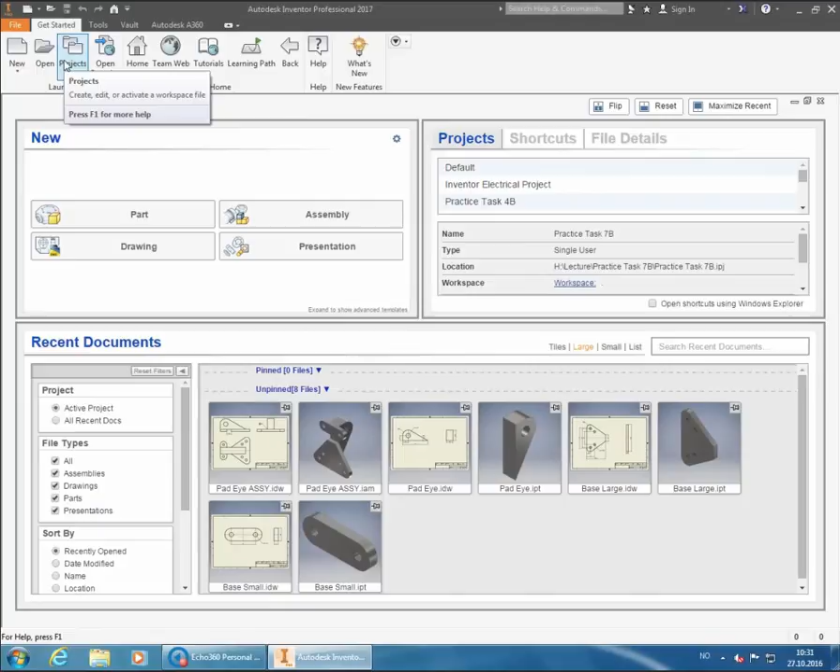First off, I'm going to start up a new project. Go up to the projects folder and start a new one - a new single user project. Find the correct folder on the H server and create a new folder there: Practice task 8B. No, 8A, it was supposed to be, so I'll change the name to 8A, and also give the project name as practice task 8A.

Just like last time, we're going to create all of these parts in the same project, so this is the only project we're creating with regard to this practice task.

So then we'll start off with the first part. Preferably we'll have everyone with us on this, but if you feel confident in not following the lecture and doing other assignments, that's completely fine. That's up to you guys on what you want to do.

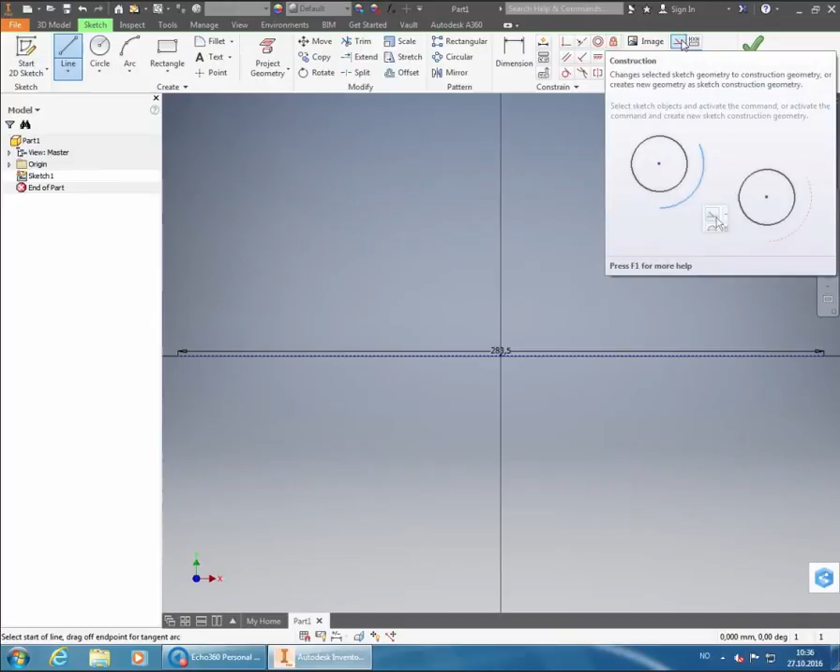What I'm going to do now is create half of the outline of this shaft - the top part of it - which means I'm going to choose the line function again. But now I have to remember to remove the construction line, because now I want a continuous line instead. So I need to go to the construction line option and click on that so it's not blue anymore.

I'll start off in one of the ends of my axis line. Right now I'm not going to set any of the diameters right away, just create the line up here. I'm going to set lengths as I go along, but not the diameters - I'll put those in with the dimension tool afterwards, just to show you a neat trick. I'm putting this line straight upwards for a bit, then creating a line parallel to the axis that's supposed to be 35 millimeters long, starting in the thin end of the shaft. So 35 millimeters - click tab to lock that into place, then enter.

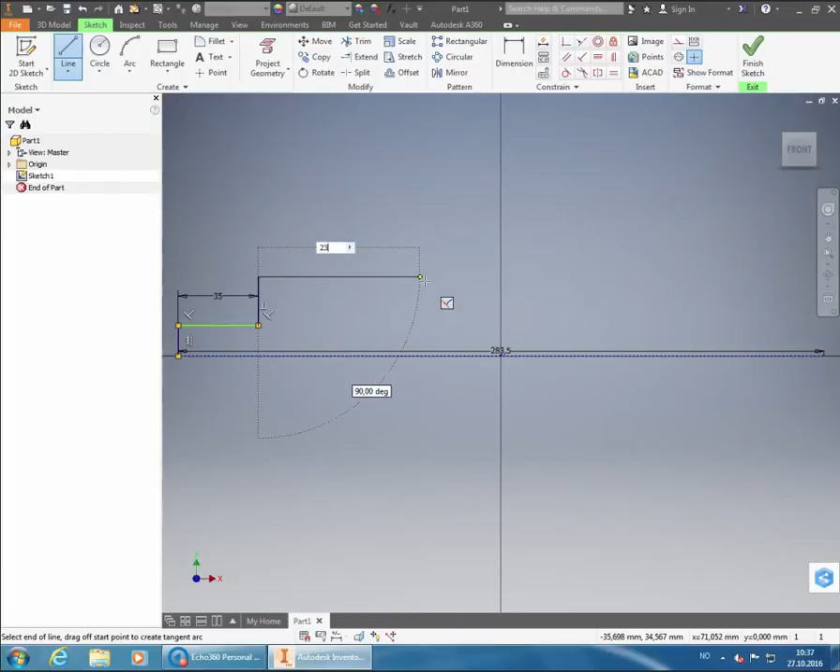Then I'm going to have an even thicker part of the shaft. So I need to go straight up here for a little while. And then I'm going to set another length. And this length is going to be the total length. Let's see, 283.5.

And of course, minus the 35 we just put into place. And then minus the other lengths that we have, so minus 36 and 34. And it's going to give me a total length of 178.5 millimeters on this one.

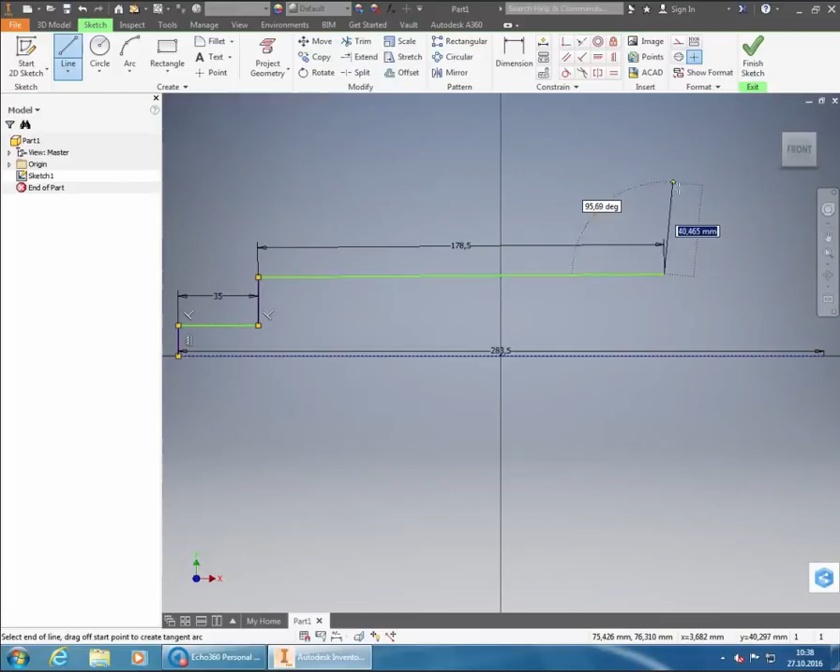Hit the enter button there. Now it's supposed to be a little bit wider again. And I can see I didn't get that one to be directly as it should. To fix that one.

I had to fix my line a little bit because it hasn't been placed in a horizontal position compared to my axis. It was slightly crooked, so I just needed to make it parallel.

Then I'll continue from the end there. I'm going to make it a little bit thicker again. And then I'm going to have a length of 34. So I've locked it into place with a length of 34, and I press enter.

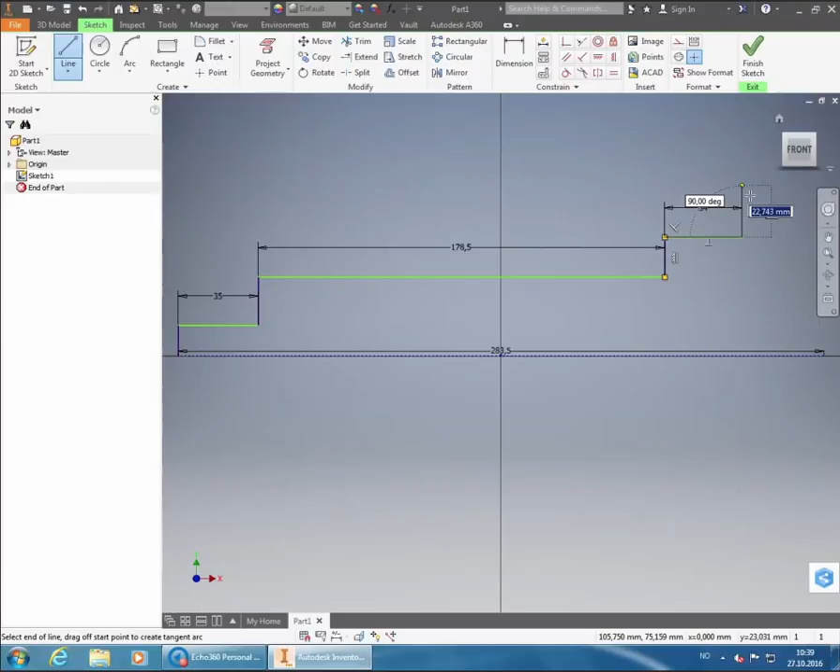And again, it's going to be a little bit wider, so a little more up there. We're going to zoom in a little bit here, because now I'm going to try to attach it to the end here. And now we've got 36 millimeters, and that's the last section that we have on this shaft. So I'm going to put it in there, and then I'm going to connect it to the axis line down here.

So I'm just going to zoom out so everyone can see a little bit here. So we have the first part was 35 millimeters. The second part was 178.5. The third part was 34 millimeters. And the last part is 36, once you attach it directly to the end of the axis.

We haven't set the height yet, so we're just putting in random heights right now, because I'm going to show a pretty nice trick of setting diameters here instead of heights.

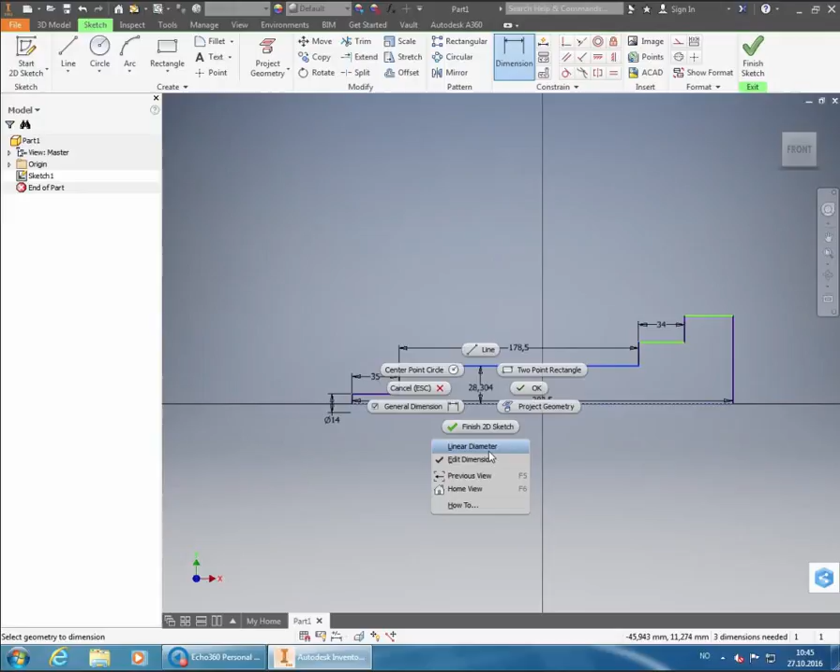And this one is supposed to be also threaded at the end, so it's going to be M20. That means it has a 20 millimeter diameter. So we put in 20 there. And this one also goes to the imaginary point on the other side of my axis.

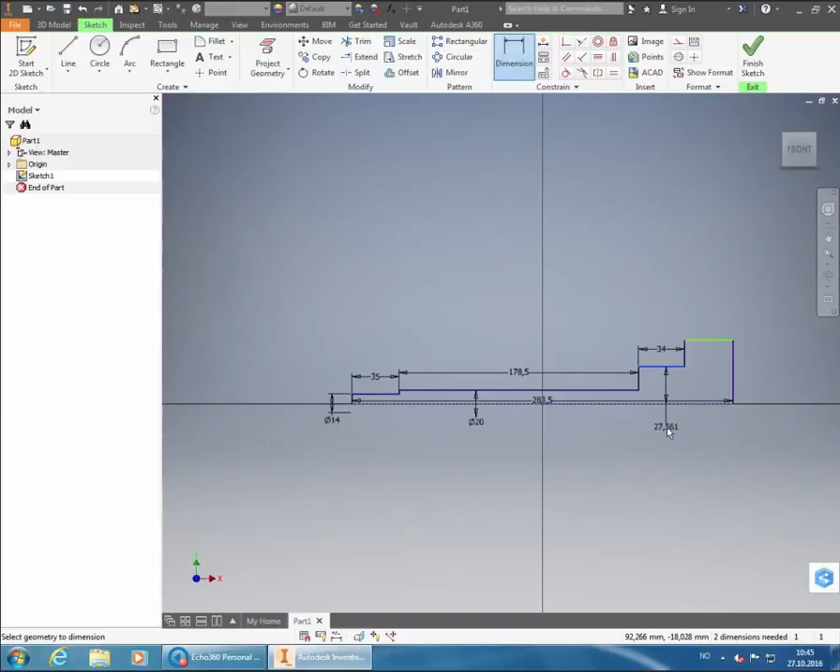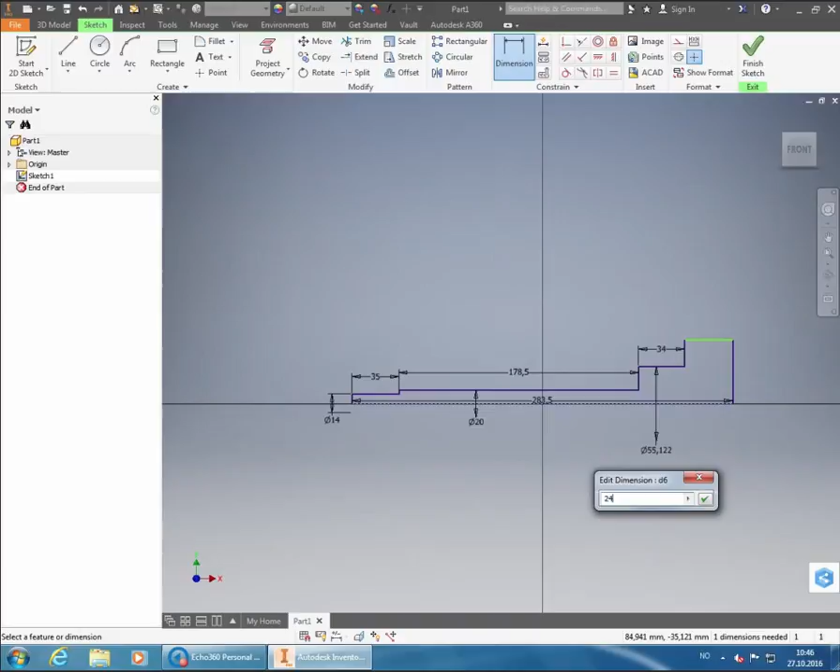So I do the same for the last two parts here. Right click and choose linear diameter, place it. And this one is going to be 2 millimeters thicker on each side, so it's going to be 20 millimeters plus 2 plus 2, so it's going to be 24 millimeters in diameter. That's because we're going to put a chamfer, 2 millimeter chamfer on the edge there once we've finished revolving this one.

Then we'll do the last diameter here. I'll zoom a little bit in here. I click on the axis, on the horizontal line, right click, linear diameter, then I place it, and this one is supposed to be 42 millimeters in diameter. So I'll zoom out a bit so that we can see everything.

Doing these dimensions in diameters isn't really necessary. You could have put in the diameter and divide by 2, just giving the length from the axis. Wouldn't have been a problem at all. But it makes it a bit easier to visualize from your sketch how this is going to look.

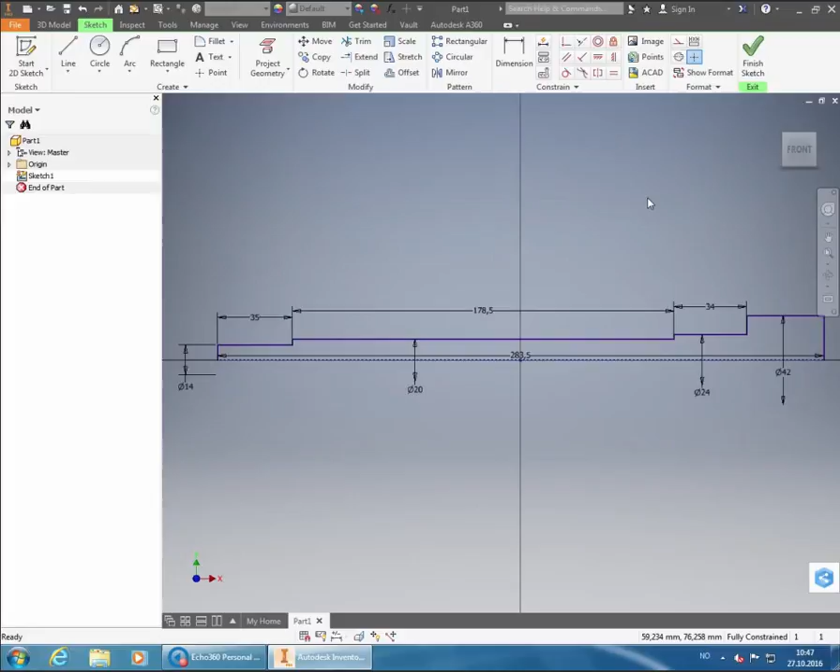It also makes it quite a lot easier if a colleague of yours later on comes in here and does some changes to this 3D model. Then they will very easily see what is what in the sketch of the 3D model, so that they can easily change stuff.

Now we're going to click Finish Sketch. We can see that we have everything fully constrained down in the corner here. So I click Finish Sketch there. I'm going to zoom out a bit so that we can see everything here.

Now we're going to use the revolve function, which we haven't used before, at least I can't remember. The revolve one is beside extrude, and it basically does the same thing as extrude, but extrude takes the outline from the sketch and pulls it in one direction, while revolve instead rotates it around an axis, so it basically looks similar to turning a workpiece in a lathe, so it's more similar to how it's going to be machined if you're doing the revolve here.

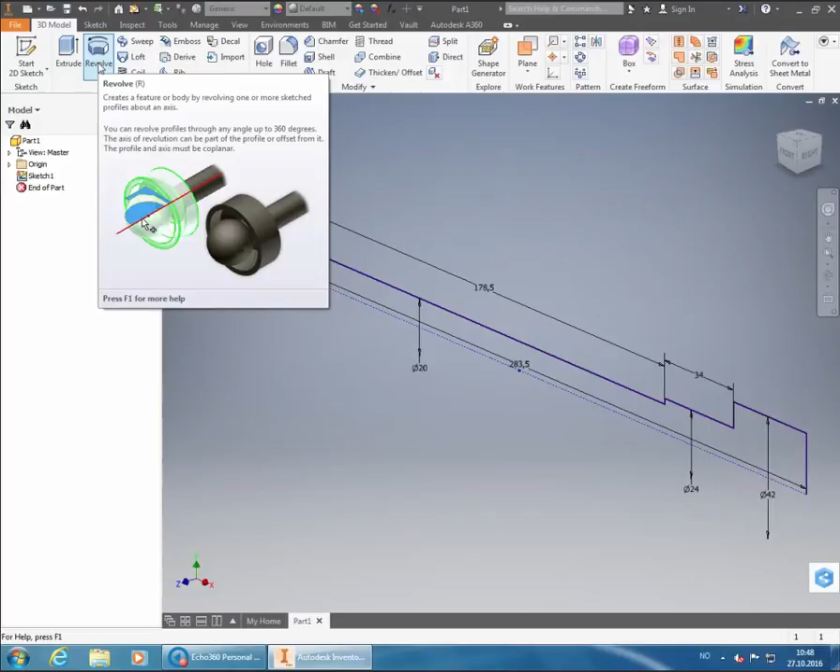So we click on revolve. I'm going to drop down the menu in the window there, just to show it a little bit better. First off, we need to choose a profile, and the profile has been chosen. Looks like it. And then we need to choose our axis, which is the construction line from our sketch.

Now we can see a preview of how it's going to look once it's been revolved around that axis. You also have the possibility, if you want, to not have it revolved a full circle. That's up in Extents there. It is possible to set a specific angle. For example, if I put a 90-degree angle here, it's only going to revolve it 90 degrees, not the rest.

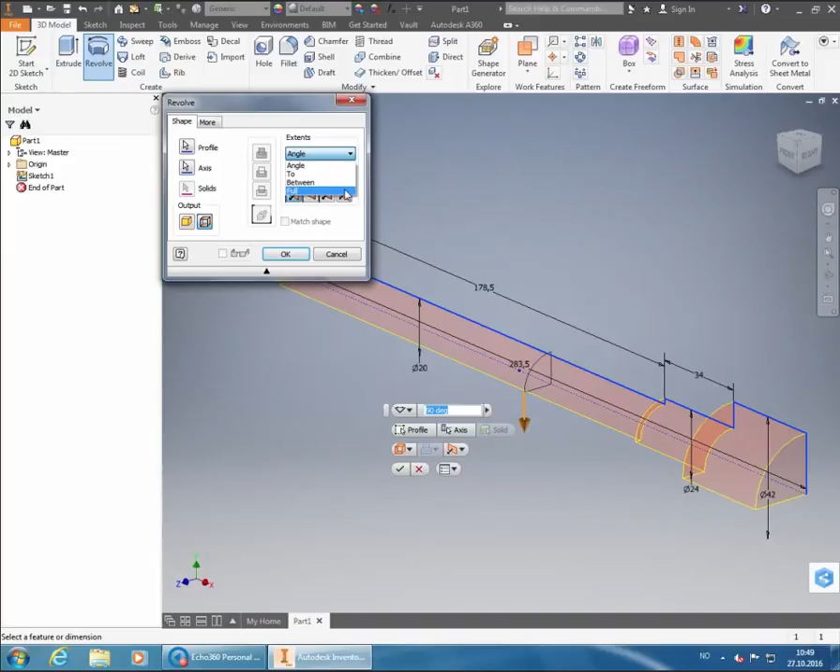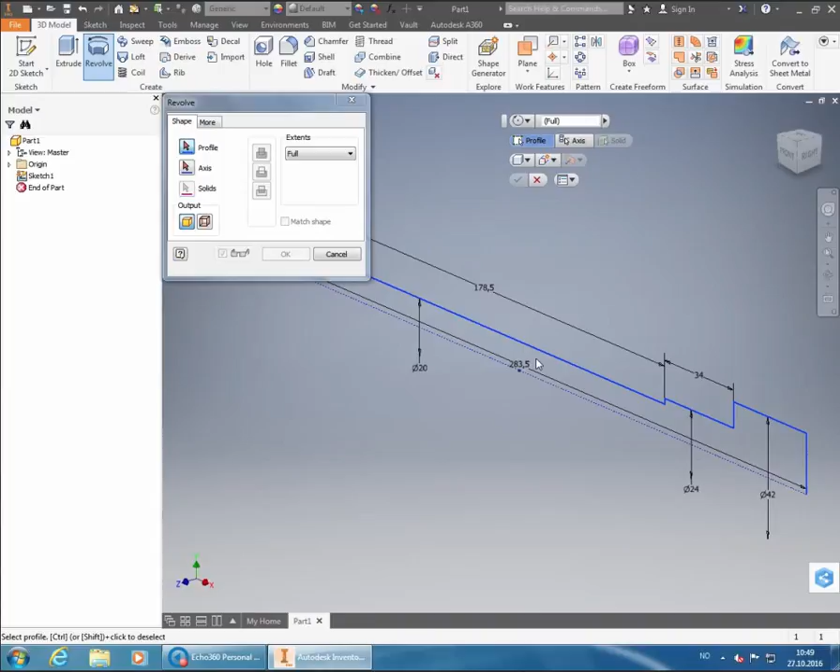But of course, we want this to be an actual shaft, so we're going to have a full revolution, 360 degrees, in order to get everything in here. Then we click OK. And I did something wrong there. Let's see. Yes, I hit the wrong one here. Let's see. I didn't want to do that.

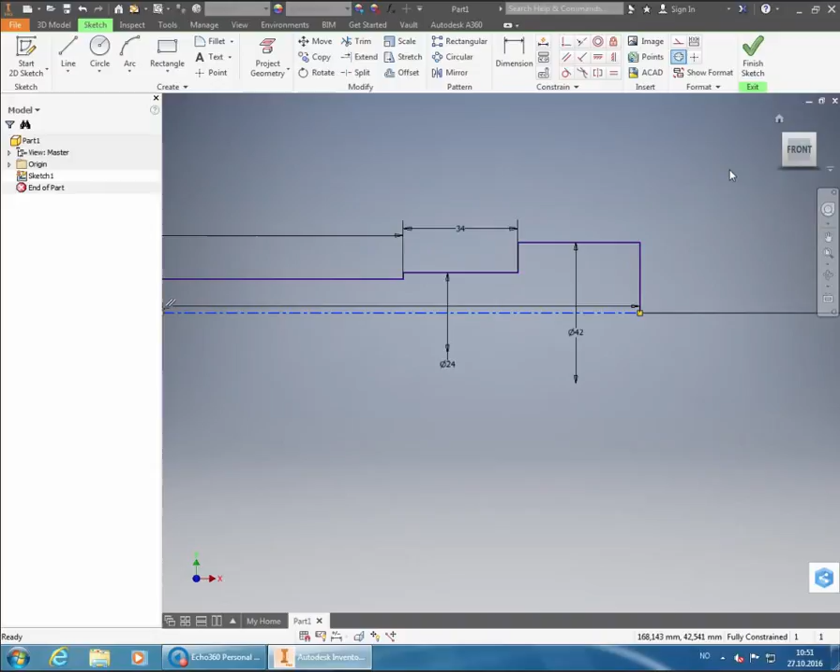So once that has been changed into a center line instead of a construction line, the revolve is going to function properly. It even chooses everything for you directly.

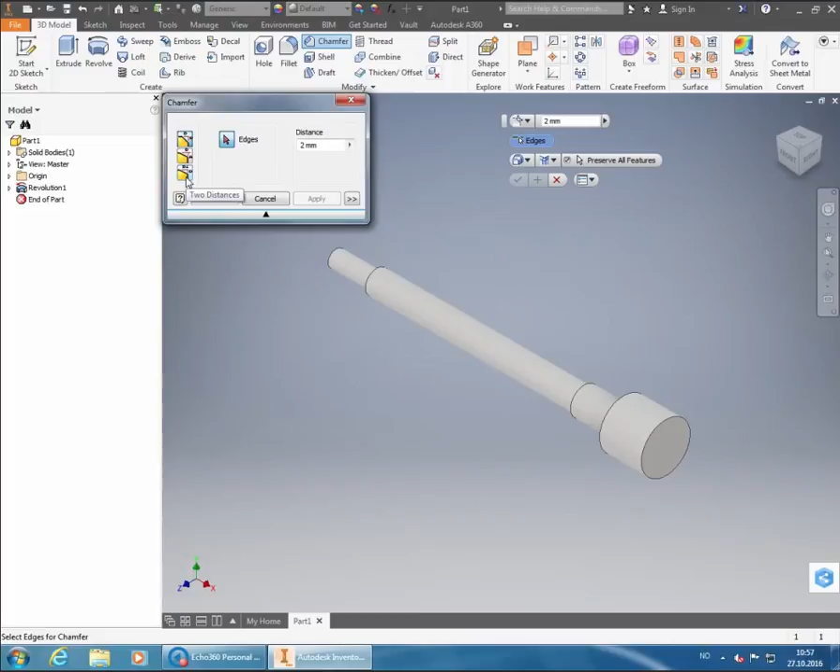On the edge here, we're supposed to have a certain diameter and a certain length in. So we can't use the regular one with 45 degrees that we usually use. We have to use another one, the third option here, which is 2 distances.

Then I'm going to click on the edge here, and zoom in a bit so that we can see the arrows. Now we can see the orange arrow is pointing towards the center here, so that's going to be the diameter measurement that we need to set. If I switch to the other measurement, it also switches which arrow is orange, as you can see.

So for the first one here, that's going to give us the diameter we need, and the diameter is supposed to be 35.5. So I'm going to put in 35.5 — whoops, need to remove the millimeters.

But as you can see, this doesn't work. I'm getting an error message here. 35.5, that's way too much, because that's of course the entire diameter that we're supposed to have, and we're talking about a radius here. So I divide it by 2. But that's not quite correct either.

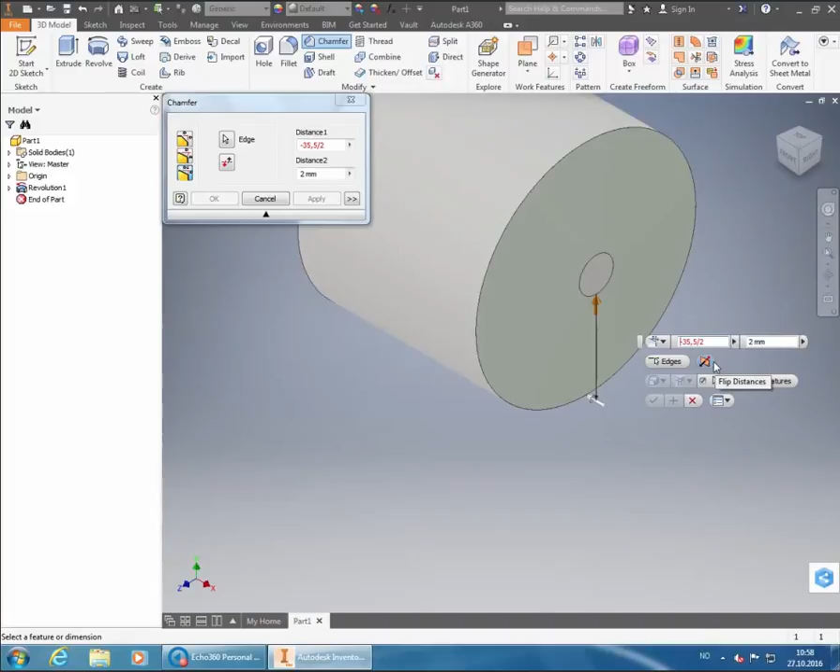So we need to go for this being subtracted from the total diameter of this one. So we need to have a minus in front there. Do you remember what the total diameter was? It was 42 millimeters. So we do 42 minus 35.5. But now we need to put those two in a parenthesis so that we get both of them divided by 2.

So this is going to give us the difference from the outside and into where we are supposed to be. So we have given 2 diameters, that's why we need to divide by 2 in order to get the radius instead of diameter. And we've done the external diameter minus the internal diameter, so we get a difference between those 2.

Then we can move over to the other one, which is going to give us the length along the axis that it's supposed to go, and this one is supposed to be 10 millimeters. So now we can see that it doesn't look at all like the regular 45 degree chamfers that we usually put in, but this is because it's supposed to fit inside something and have a complete seal against it.

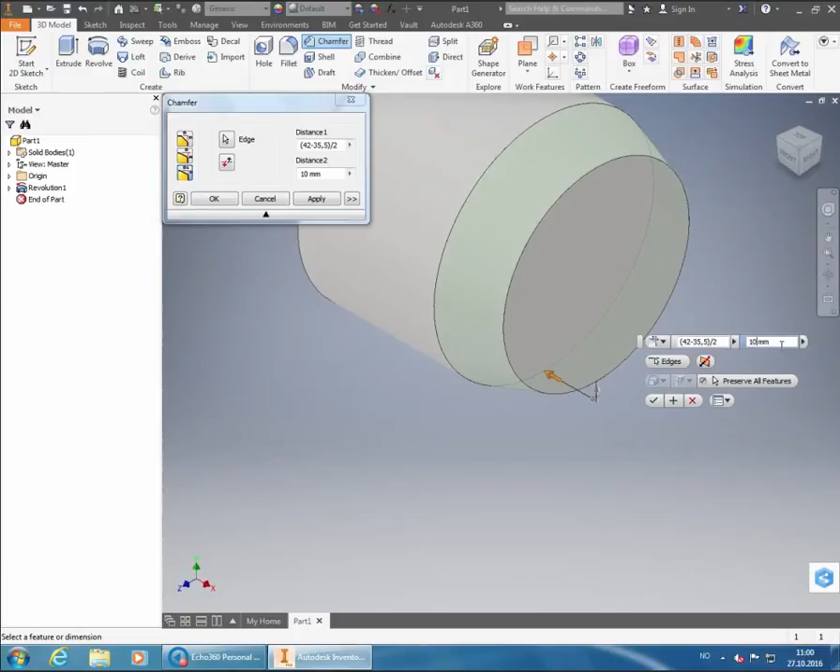So now we can place this one. Click OK. So that one is in place.

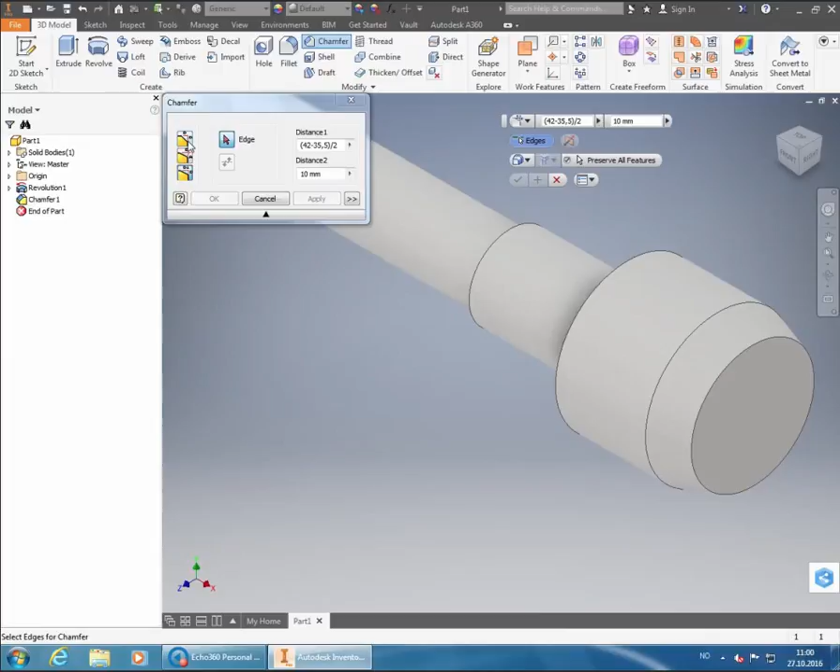The next chamfer that we're going to place is along this edge, and that one is a regular 45 degree chamfer of 2 millimeters. So we go in for our chamfer, we switch back to the top option there, which is the 45 degrees, and we switch the distance to be 2 millimeters. Then we select the edge there.

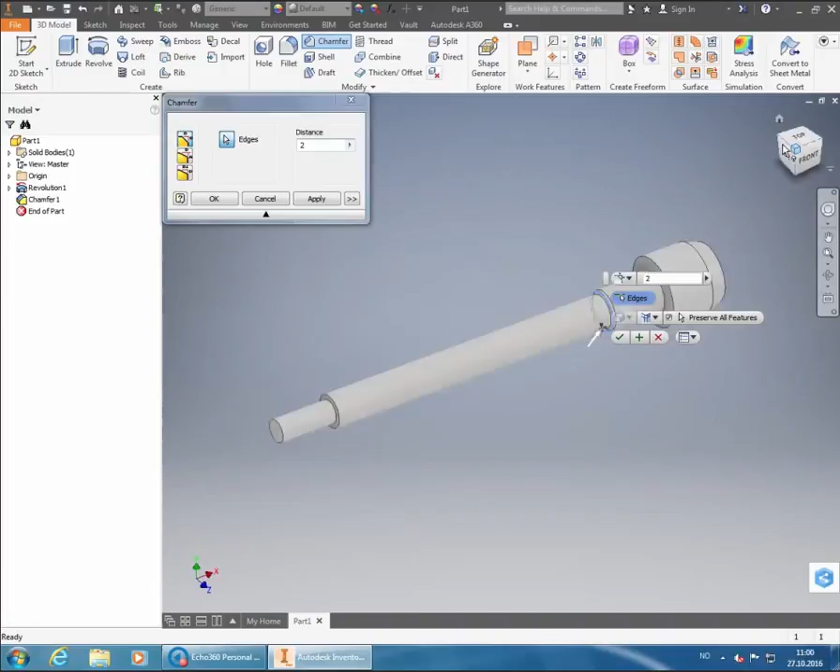I'm going to switch my model around so that we can see it properly. So there we have a 45 degree chamfer on that one.

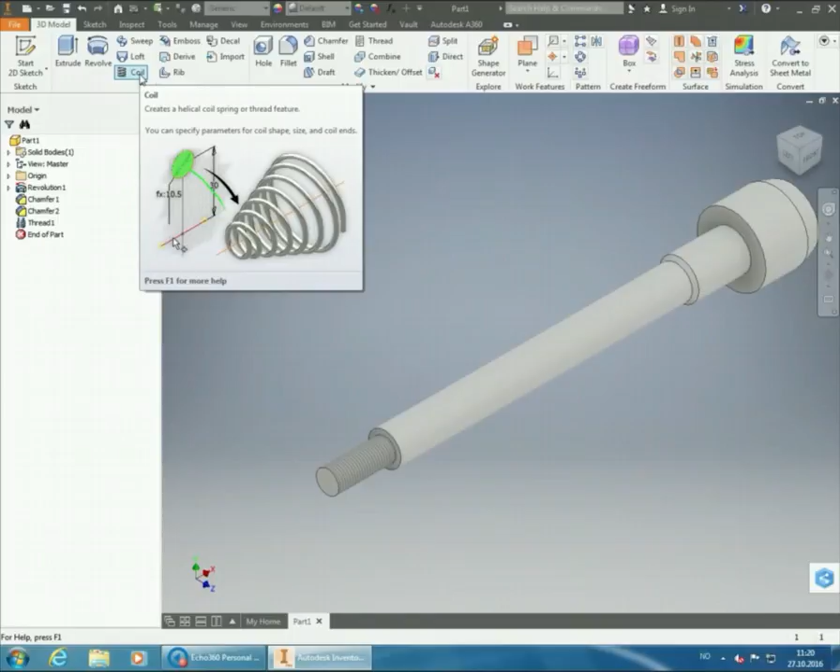So you would have to use the coil function, and it starts getting really complicated when you do that, which is why using the thread function is so much easier. Because when you're creating stuff like this, you're most likely not going to 3D print it - maybe a prototype, but most likely you're going to have someone machine it, and they only need this image information placed on top.

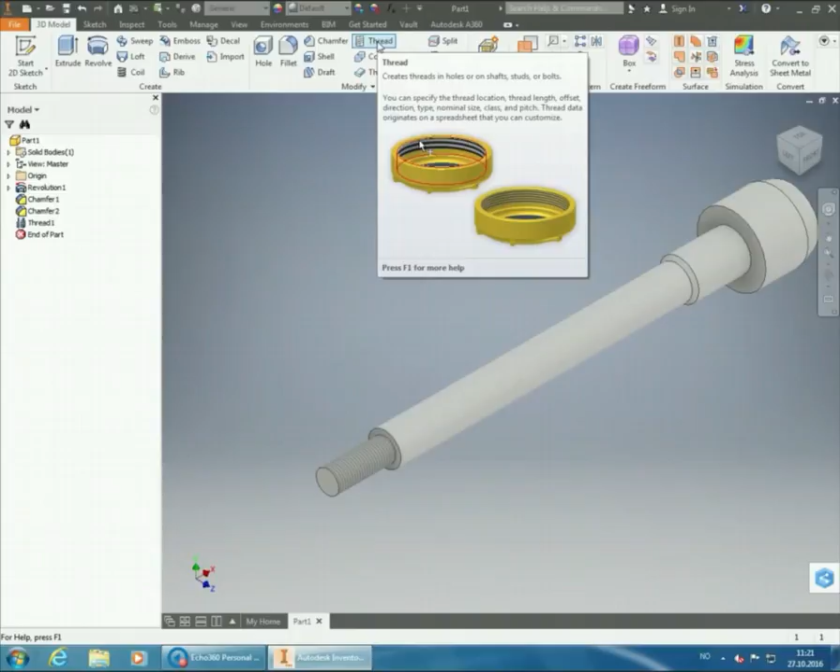So then we're supposed to have some threads going up here also, but on this part of the shaft we're only going to have the threads going 95 millimeters up, not all the way to the end. So we have to use the thread function again. We'll select this larger diameter, and you can see full length is chosen now, so it's trying to put threads all the way up. I'm going to select it first, then remove the check mark on full length.

Here we can see it's putting it over on this end - I don't want that, so I need to reset the threads. Now we can see it's putting it on this end. My problem with the first one was that my mouse pointer was too close to this end, so it shows that as my starting point. If I move my mouse pointer over here now, it also moves the threads over here.

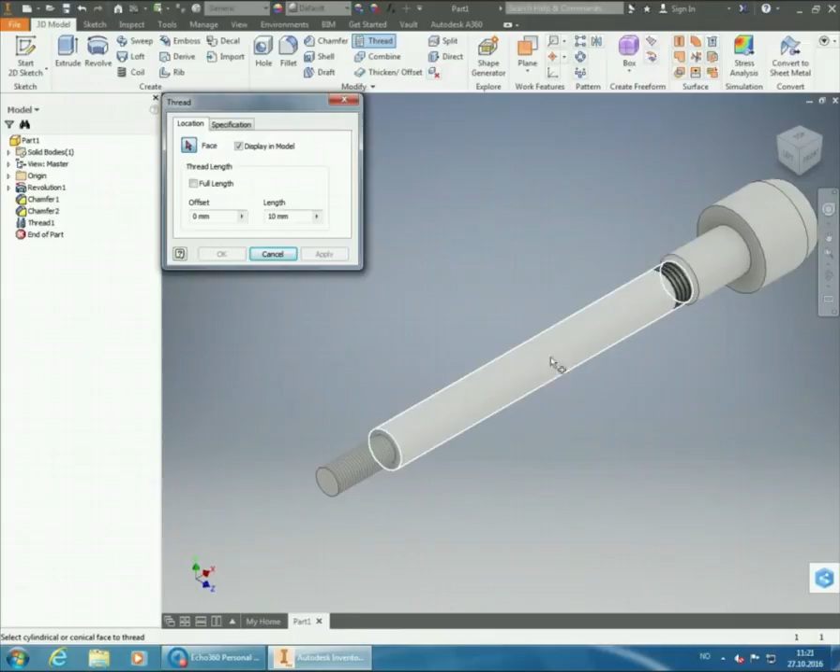So I'll move it back here, select it again, and it says 10 millimeters now, but it's supposed to be 95, so we need to change it to 95 millimeters. There is also a possibility of using an offset.

So if you want threads, but for some reason you want them in the middle of the shaft, you can use the offset, for example 50 there. Then I've moved the threads into the middle of the shaft. This might be necessary if you're going to have some cog wheels or something rotating here and then pushing the rod along.

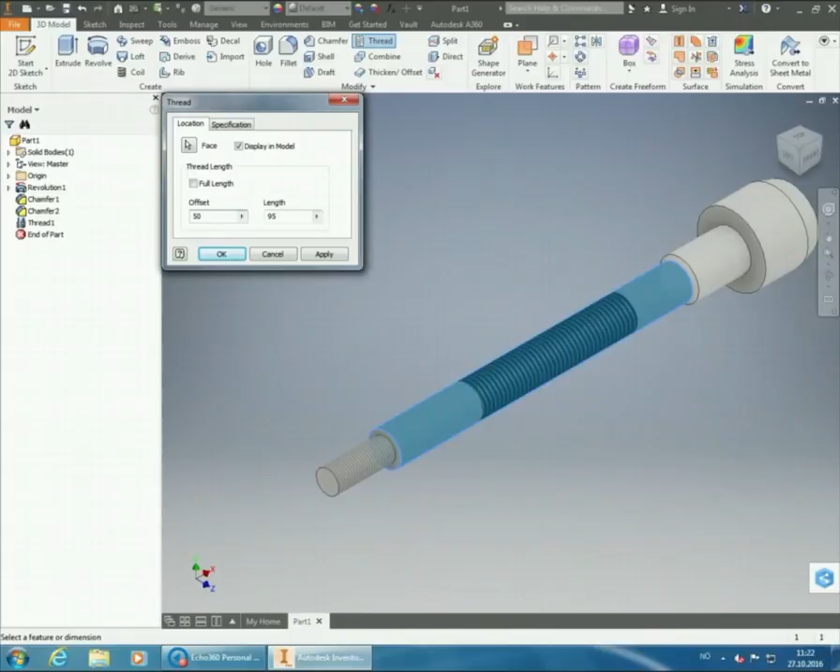But usually when you're using threads, it's in order to screw a nut onto them, so then you want them all the way to the end, or else you're not going to reach the threads with them. So we want 0 there.

Again, we'll go over to the specification. We can see that Inventor wants us to use ANSI, which is an American standard. But we want the ISO one, which is the European one, with the metric profile. And on this one, we're also supposed to have a pitch of 1.5.

So we change the designation, and we go down to 1.5. And you can also see it says right hand and left hand there.

Maybe you can remember, I talked a little bit about it in subsea technology, with regards to which way you are tightening and loosening your nut. Right hand is the usual one. When you are rotating it clockwise, it's going to be tightened, and rotating it anti-clockwise, it's going to be loosened. But if for some reason, if this is a rotating shaft and you need your threads to go the other way around so that it won't loosen itself while it's rotating, then you would choose left hand instead, because then you're telling it to go the other way. But so long as you don't have a particular reason for using the left hand, we always use right hand.

So we click OK there. So then our shaft is done.

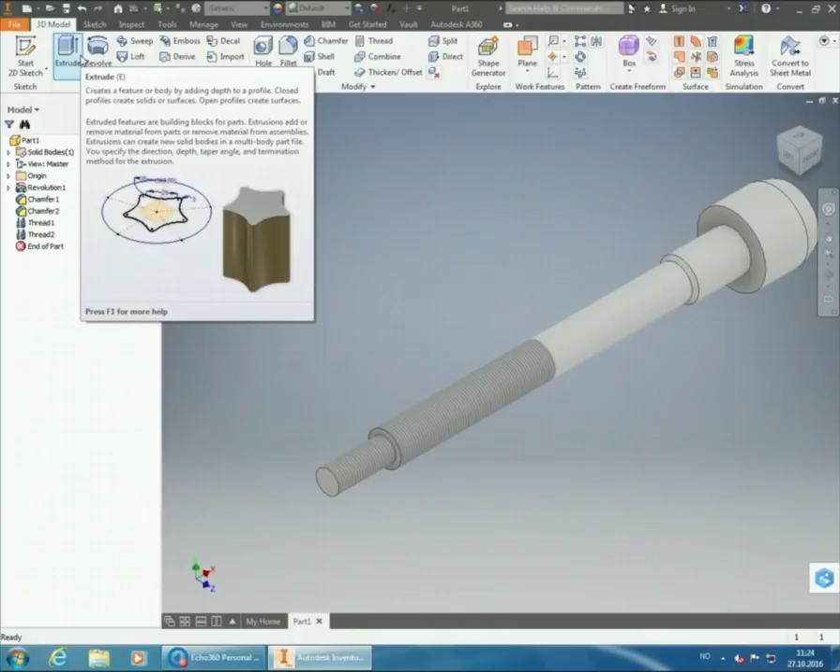We'll go into creating the drawing for this one, just very briefly, just so that I can show the dimensions for these two parts with threads. So I'll save this one, and this will be shaft. Save. Then I'm going to create a new drawing, ISO.idw as usual.

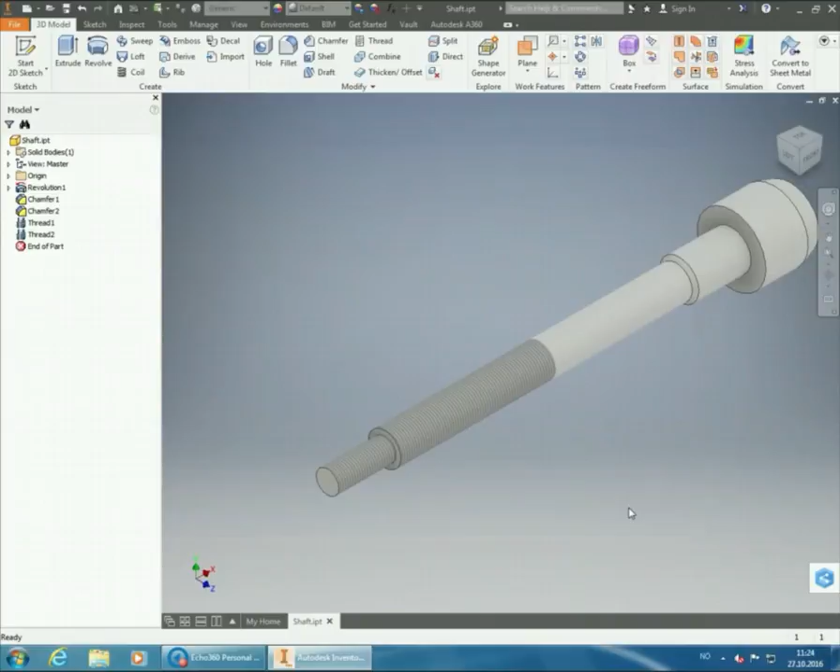Click create there. I'm just putting in my base view here. Have it on a scale of 1 to 1. Click OK.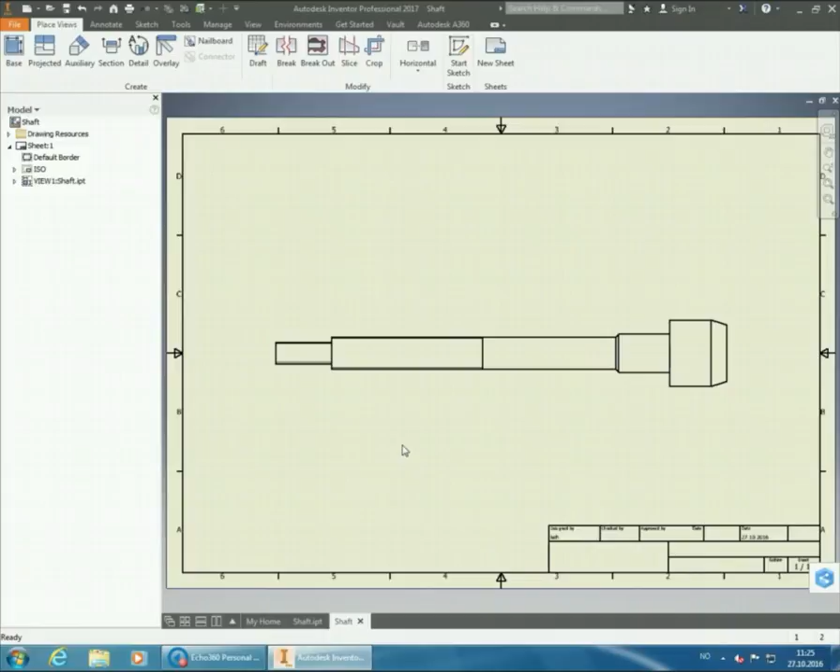So what we can see now, it looks a little bit different here, and that's because we have threads there. I'm just going to zoom in a little bit to show you better. Here we can actually see that the threads are being designated by a thinner line going on the inside there, and that's to show the smallest diameter in the thread cross section.

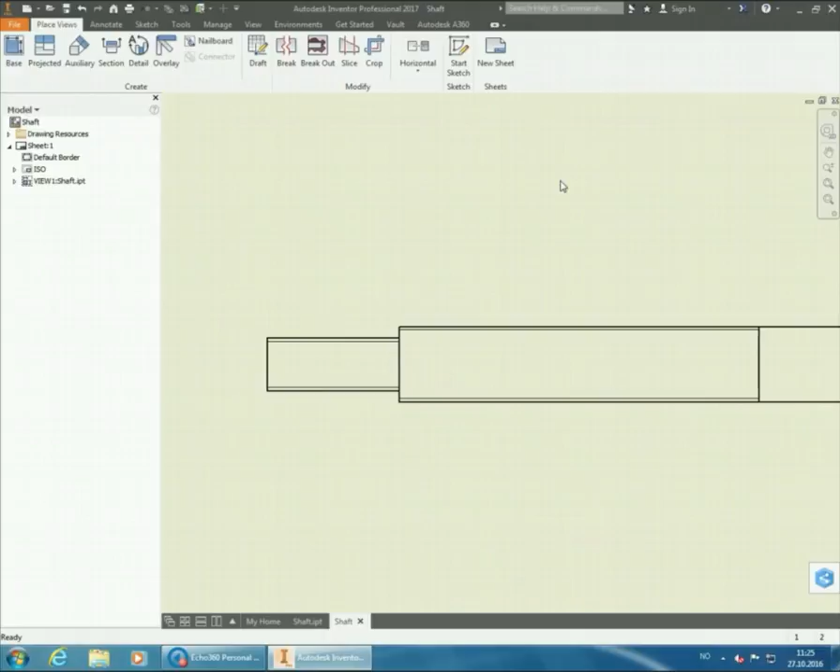So what we do when we need to show the dimension of threads is that we go over to the annotate part, and we use the hole and thread function. And instead of pointing it to a hole, as we've done earlier with the hole and thread function, we're going to click the edges of the threads here.

So putting dimensions on threads is fairly easy. We just use the hole and thread function instead of a regular dimension for setting a diameter, because then it's going to give us all the information we need with regards to these threads. I'll just save this one so I have it.

The next part in the compendium is a bolt, and if you follow what's being done in the compendium, it basically shows you how to do the coil function also to actually model the threads three-dimensionally.

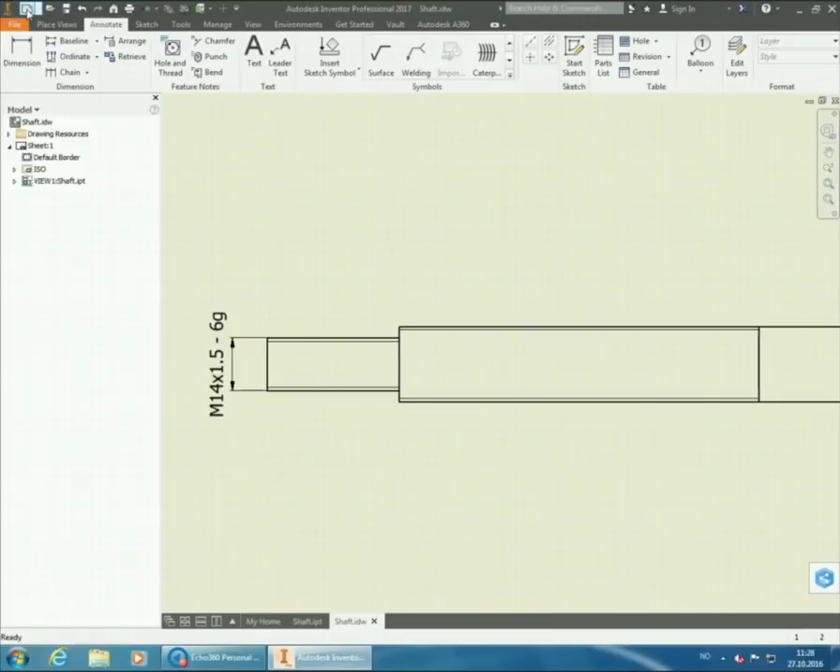Until we get to part 5 in this practice task, the valve flange. And now we're going to start on that one. So we're going to open a new part file, standard in millimeters.

So we'll start off by making the base of this valve flange, so the flange part itself. So we'll start a new sketch. And the base is circular, so we'll start off by creating a circle. We attach it to the center point in our coordinate system.

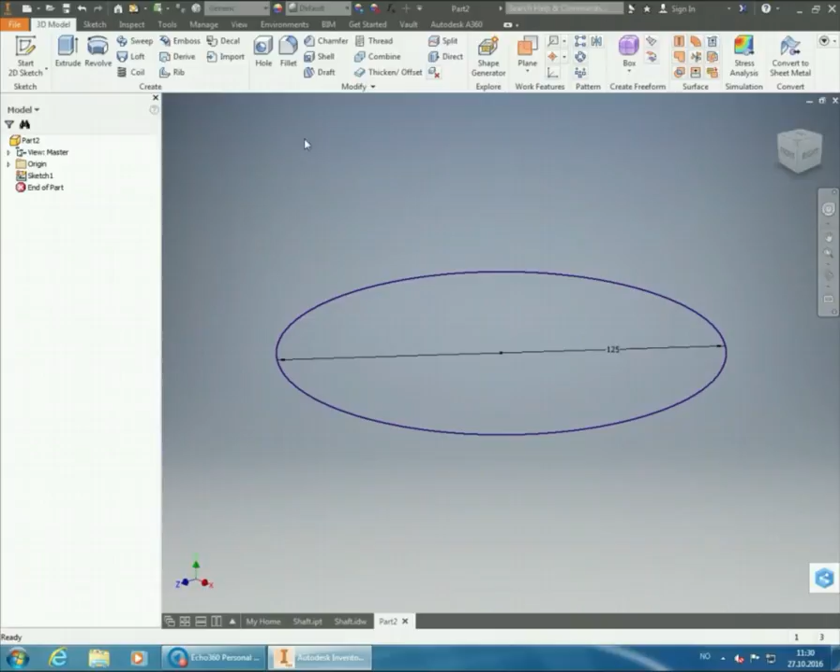And I'm going to extrude it. We're going to create a couple of holes in it later on, but for now we're just going to extrude it as a circular plate. The thickness is supposed to be 17 millimeters.

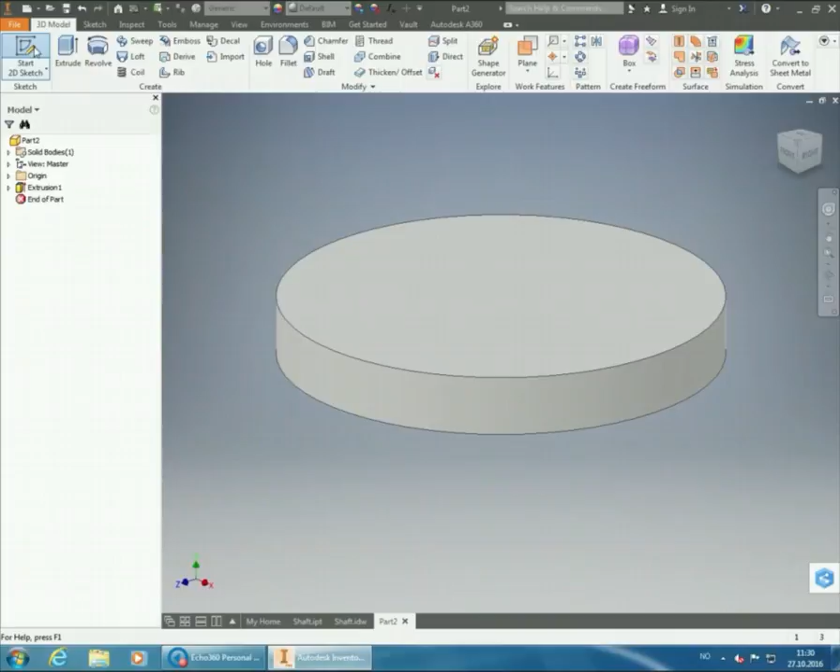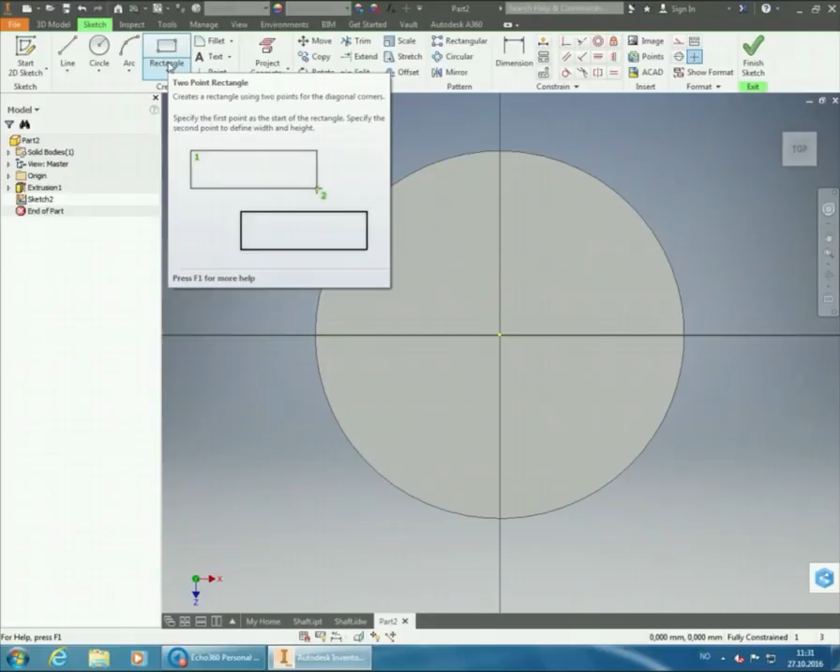Now we're going to create a sketch on top of this circular disc, creating the box that's going to protrude out of it. We need a rectangle centered in our coordinate system, so we'll use the drop-down menu and choose the rectangle option that lets us define the center point.

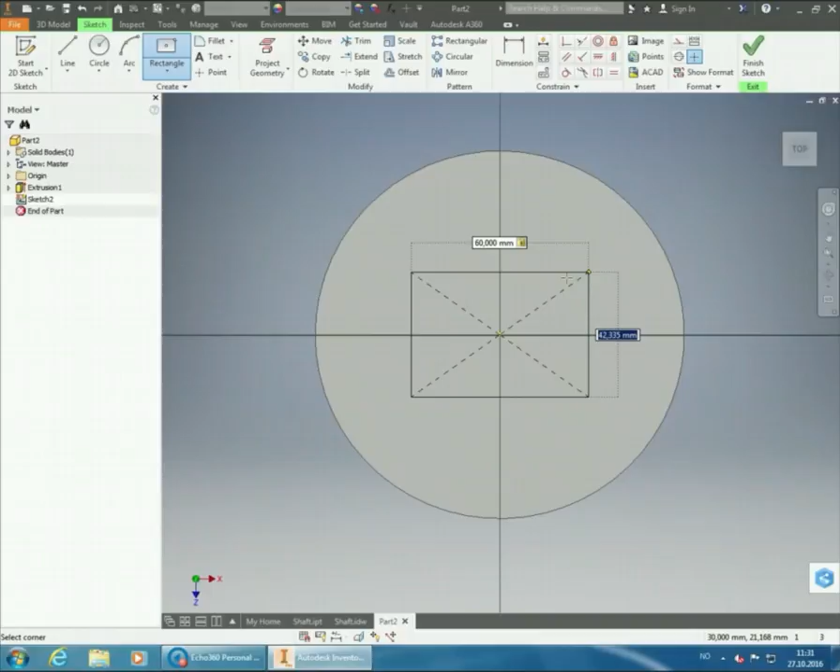It's going to be 60 millimeters wide. Use the tab button to go to the other dimension, and it's going to be 40 millimeters thick. Again use tab to lock the dimension into place, and then click enter.

Then I can finish the sketch and extrude this one, 80 millimeters tall. So now we have a circular disc with a rectangular box on top of it.

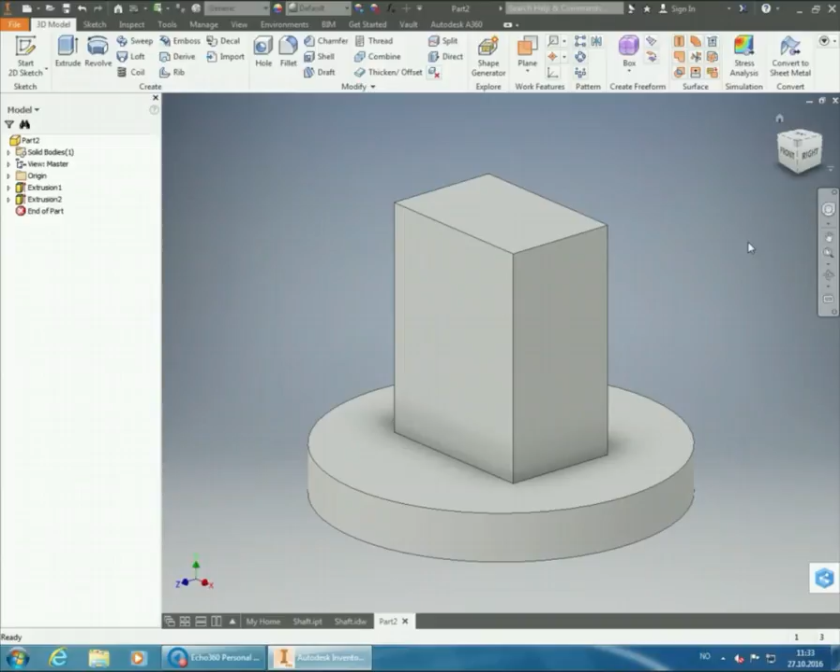The next step is to hollow out this box. We're going to create a sketch on the largest side of it, the one that's 60 wide. So we'll create another sketch here, just zooming in a bit.

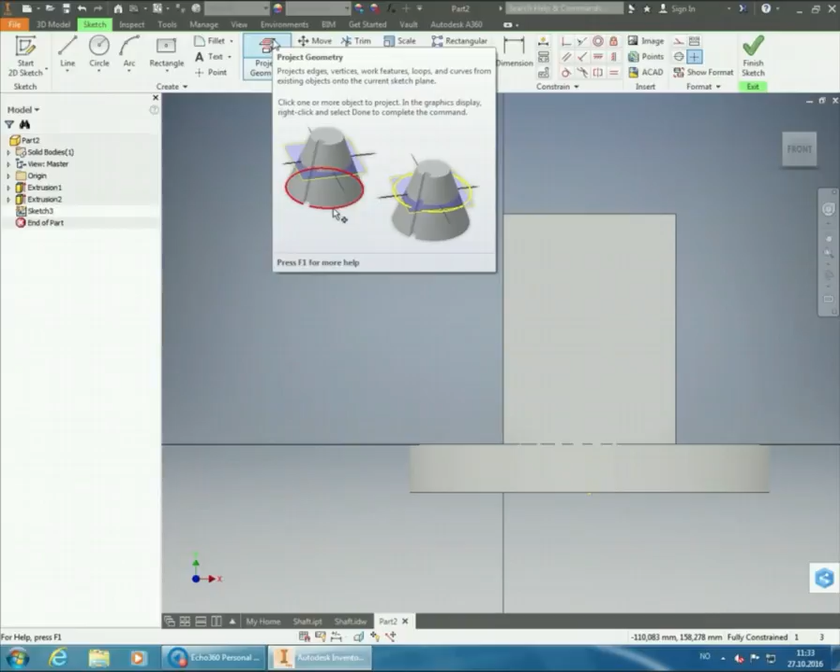To make life easier, we're going to project geometry so we can attach our sketch to the edges here, getting yellow lines showing everything. Since the plane of our sketch isn't the same as the edge of the circular disc, the disc is actually sticking out of our sketch right now. So we can press F7 on the keyboard.

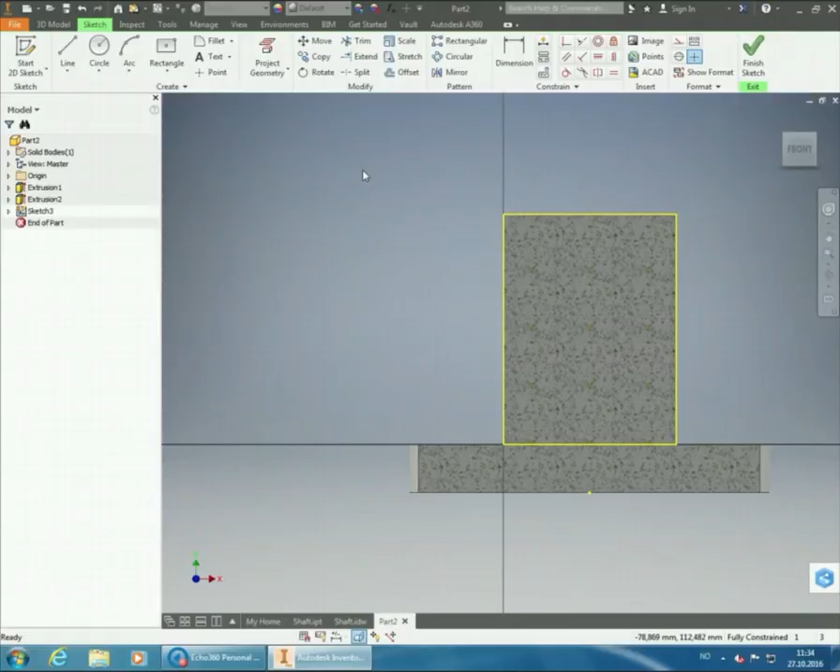Pressing F7 shows our 3D model as cut instead, which makes it easier to see exactly what we're doing if we're modeling into the disk. Pressing F7 again pops it back to normal. It's not a big problem here since we're only modeling on the flat surface, but once you're modeling something hidden by something else, it's nice to use F7 to see what you're doing in the sketch.

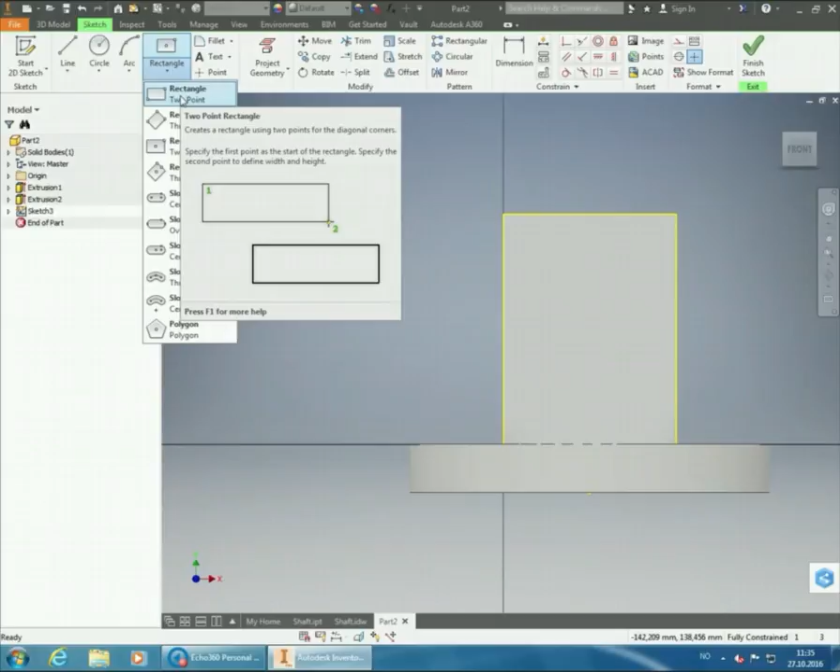So I'll leave it visible like this while we're doing it. This time we're going to create a new rectangle, just a regular one where I set 2 corners, since I'll set the dimensions afterwards. I'll just place it fairly randomly inside here.

Then we're going to set the distances to the edges. We go up to dimension constraints, and we're supposed to have 10 millimeters to the edge, so 10 millimeters up top there.

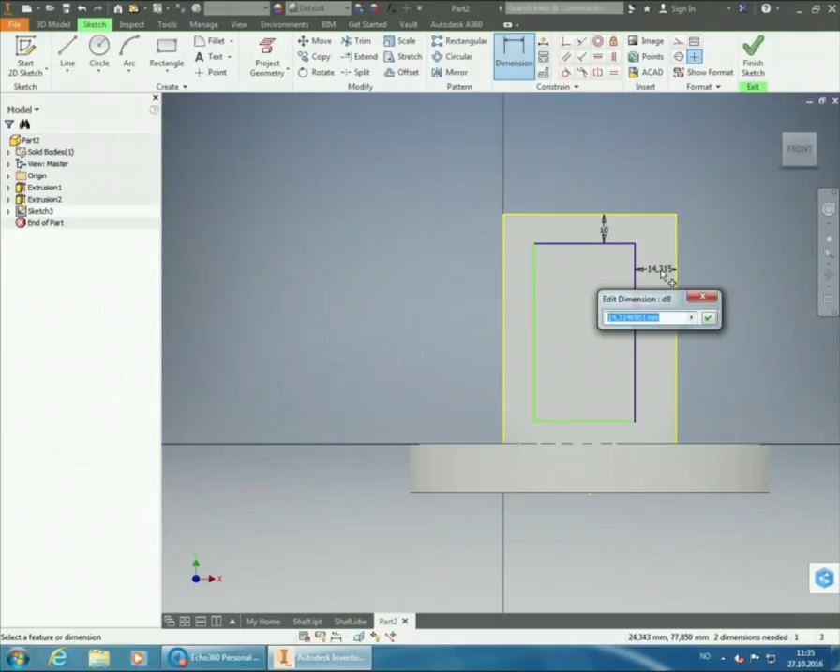Then I can do the same for the sides. In case I need to change this dimension later, I'll connect it to the top one so I only need to change one to change all. I'll click on the top one and place it, doing the same down here and over here. So if I change the top dimension now to 12 millimeters, all of them are going to change to 12 millimeters.

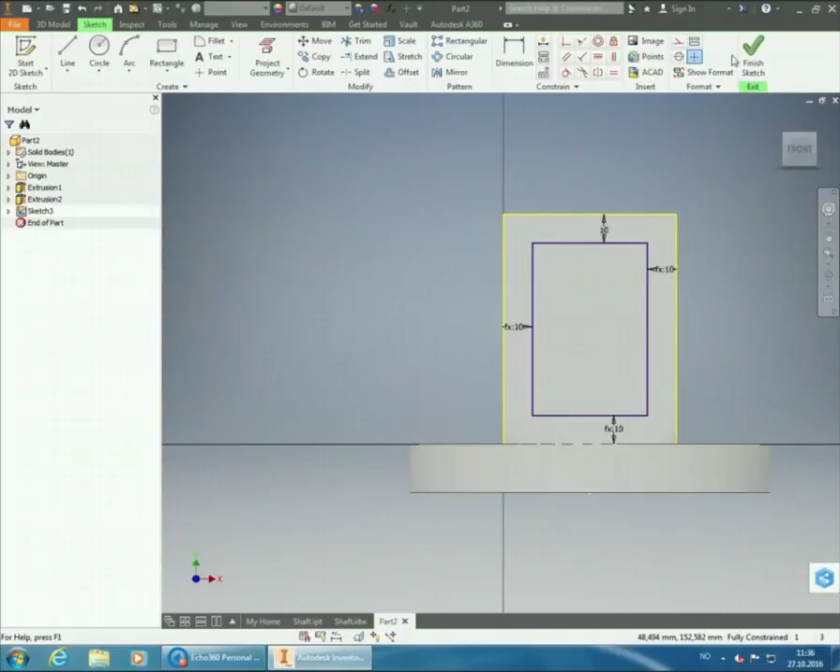Once that's done, we finish the sketch and use the extrude function to make a cut through the box here. Since we put in the yellow lines, Inventor doesn't quite know what outline it's supposed to use - is it the small rectangle or the large rectangle? So we have to tell Inventor that we want the center rectangle to be extruded.

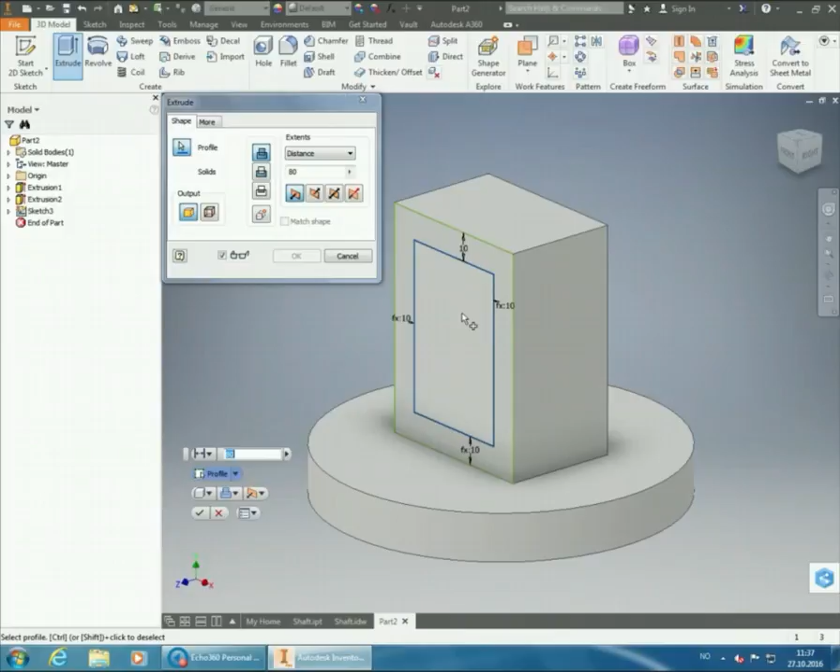The default in Inventor is to extrude and create more material, but we want it to be cut, so we'll go over to the cutting function. In this case, we could let it stay at 80 on distance, or we can choose all, since that will cut through all of the material no matter what.

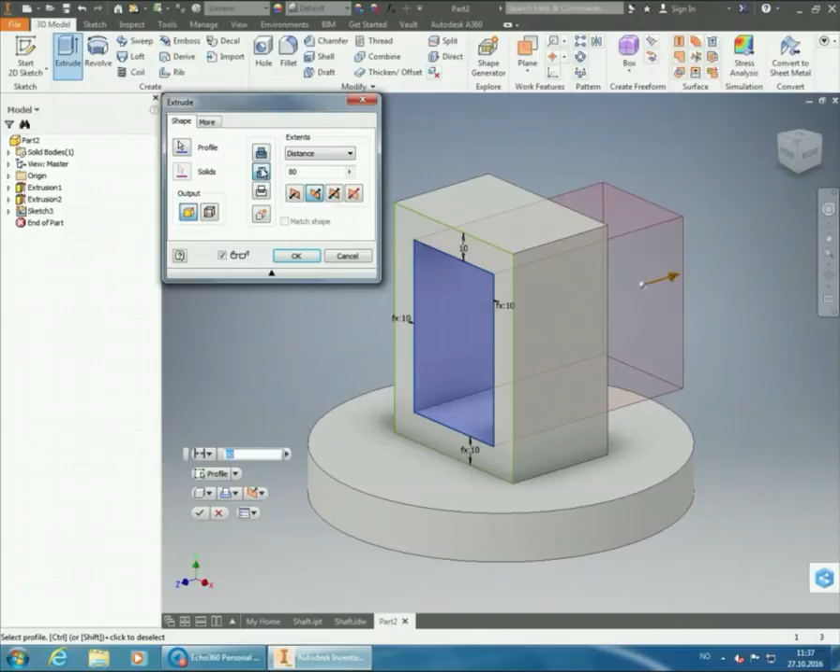So if I rotate my 3D model a little bit now, we can see that it's possible to see straight through it. So we've created a hole straight through it.

The next thing we'll do is create fillets for all of the edges of our square box. We're going to have 5 millimeter radius fillets on everything.

I'll just rotate it back here and go up to the fillet function. We want a 5 millimeter radius, and then we just need to start clicking on all of the edges here on the box. I'll start up top.

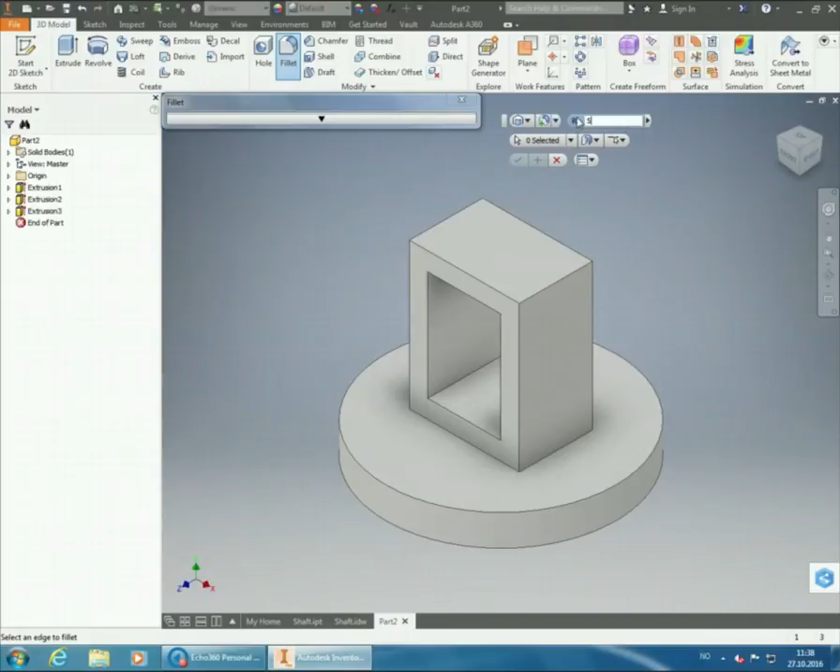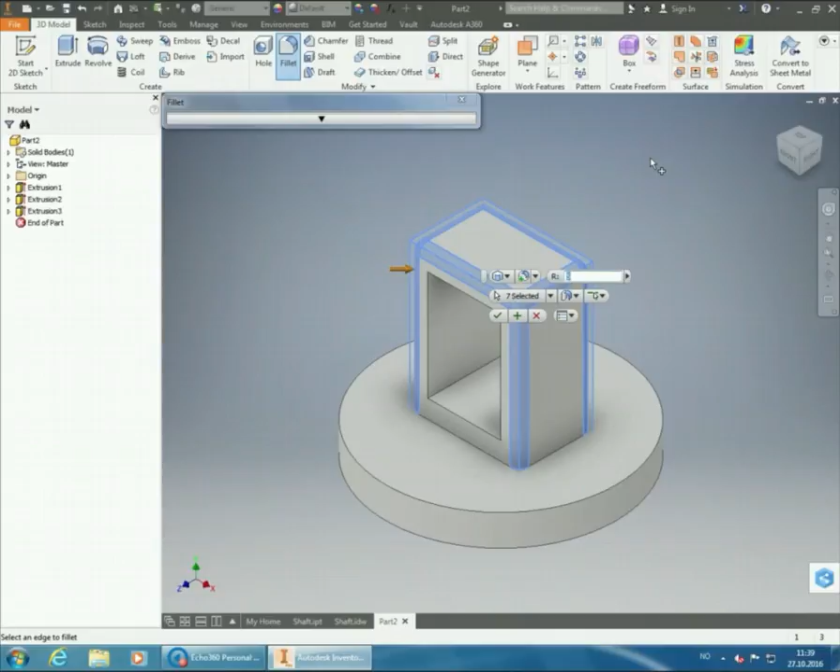So I've done the outer edges of the top there. I'm going to do the sides, the outer sides. And I also need to do the cutout inside here, so I need to do these edges.

Now I need to rotate it because there are a couple of edges I haven't clicked yet that are over on the other side. So I'm going to rotate it 180 degrees and continue clicking on edges here.

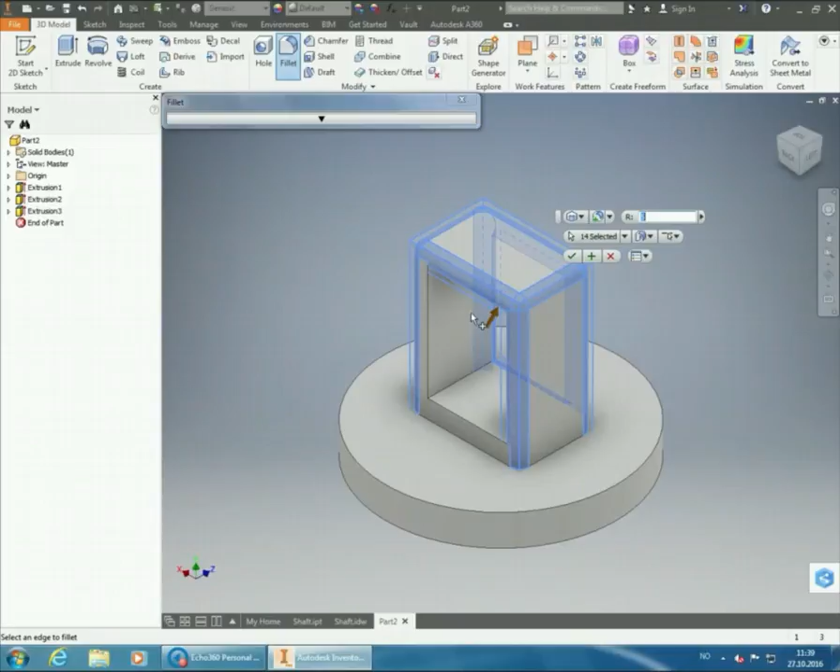So now I've done the outer edges of the box itself, and I've done the openings of the cutout, but there are still some fillet edges I haven't selected yet, and that's the inner edges. Those are also supposed to be 5 millimeters.

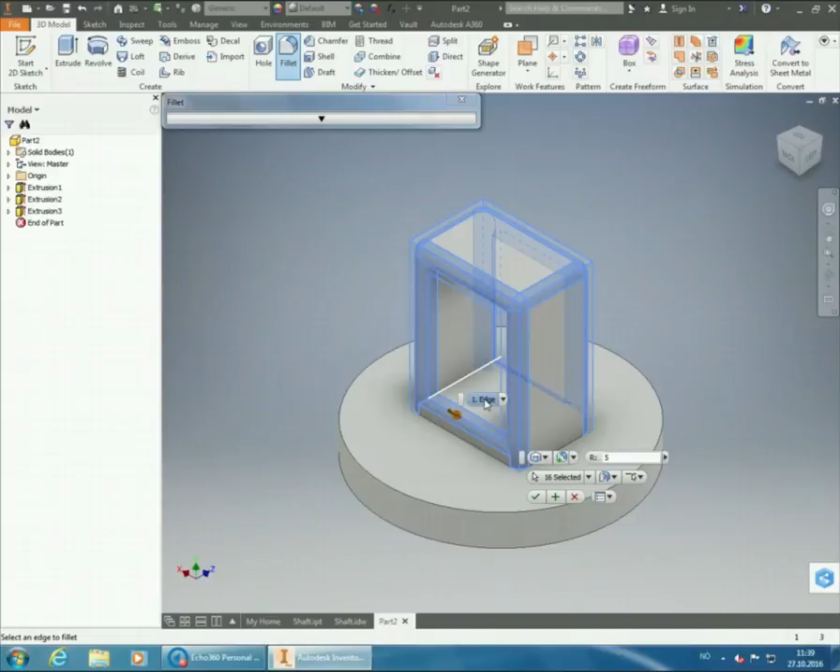So I need to select that edge, and I need to tilt it a little bit so that I can do this edge up here easily. Tilt it over here to get this edge, and tilt it back down here to get this edge.

So now I've actually marked all of the edges of this one. The only edges I haven't marked are the ones connected to the circular disc, but those aren't supposed to be filleted. So then I place it.

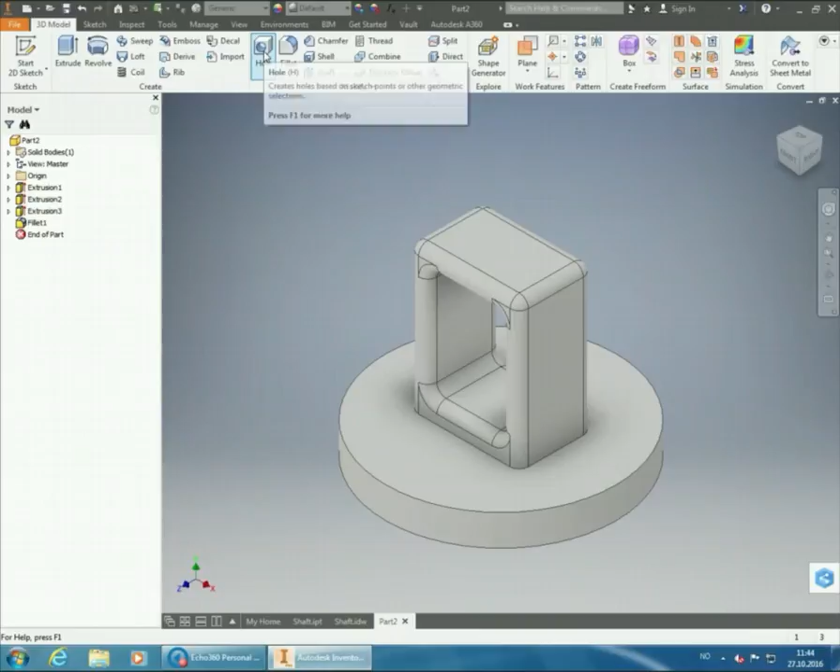So we'll start off with the hole up top here. I'll use the hole function and select the surface up top there. I'm just going to zoom it in a little bit so that it's easier for you guys to see.

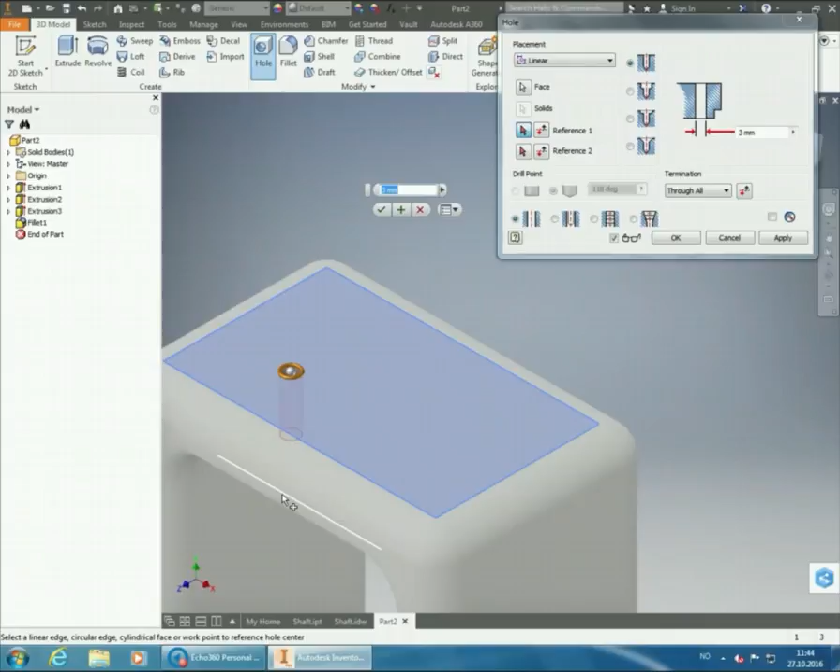Now I need to click on some edges to give references. We'll try to hit the edge of the fillet here, because we know that from the edge of the fillet to the other side we have 40 millimeters, so we can set 20 in order to get it to the middle. So we click on that edge and set 40 divided by 2, or 20 directly. What's going on here? It's refusing to choose the fillet edge.

That means we need to do 30 divided by 2, so the reference is this edge instead. We've done a 5 millimeter radius on both sides, so our surface up top here is 30 millimeters instead of 40. We need to take that into account when putting this in.

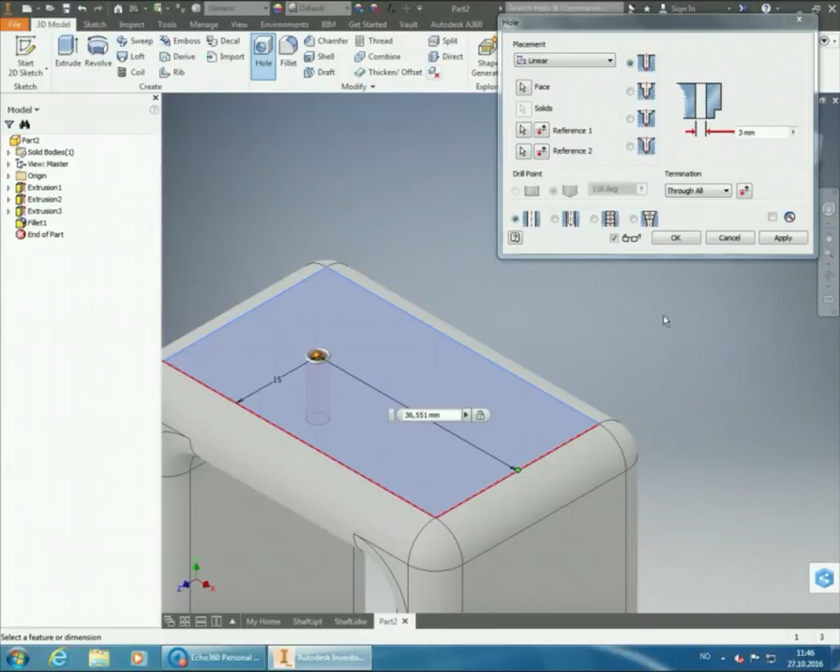The other reference point will be on the other side here. We have 60 all the way across, but we need to remove 10 because of the R5 fillets, so 50 divided by 2, in order to get it in the middle.

And we are supposed to have threads going through here, so we want the threads to be able to pass through this hole without touching the edges. If we put a regular hole there with a 20 millimeter diameter, we risk collision between our threads and the edges of the hole. So instead of placing a regular hole, we're going to place the next option, which is a clearance hole.

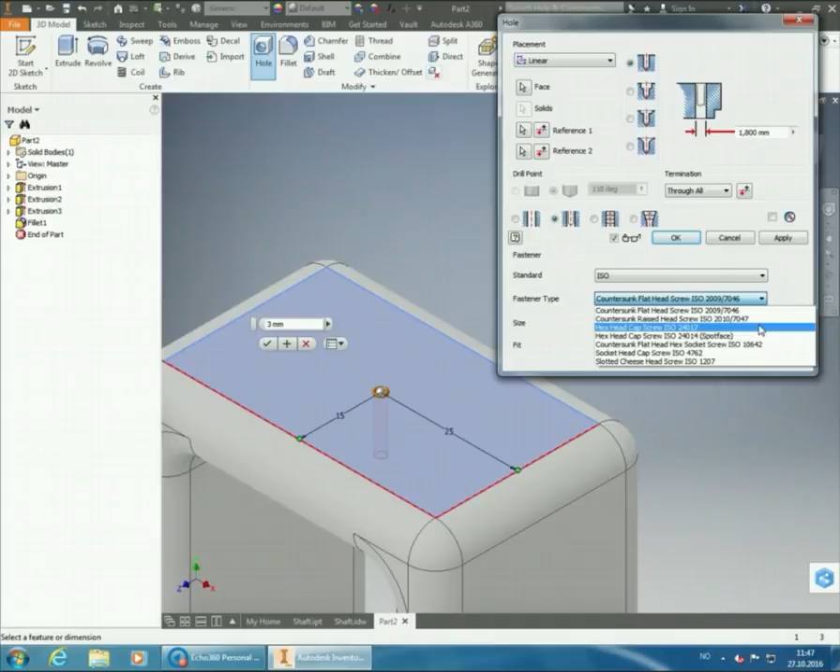So we're going to get some more information that we can fill in here. The part of the shaft that's going to go through this hole, that's going to be the M20 part. So we're going to have M20 threads going through here, which means we're going to choose ISO instead of ANSI unified screw threads. We're not going to have a countersunk flathead either, we're going to have a hexagonal head cap screw. And we're going to set the size of it, which is M20.

And then we have the bottom one here, which is the type of fit that we want. Basically, how much clearance do we want to have on this one? In this case, we want a close fit for it.

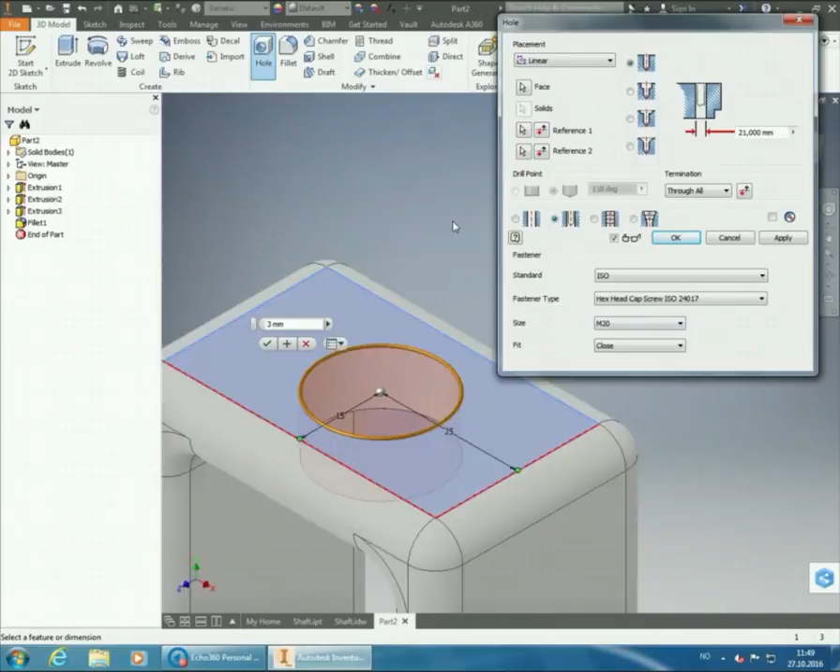Once that is done, we need to make sure that we're not creating the hole all the way through like we're doing here, because down here we want threads on our hole. So we're going to change the termination, as it's called here, and we're going to use the To option.

That means, let me move this one over here. If I change my view a little bit and rotate it around, the To option means I can click on a surface and it's going to create a hole to that surface. So if I click on the surface underneath here, a little bit closer, it's only going to create the hole through the top part.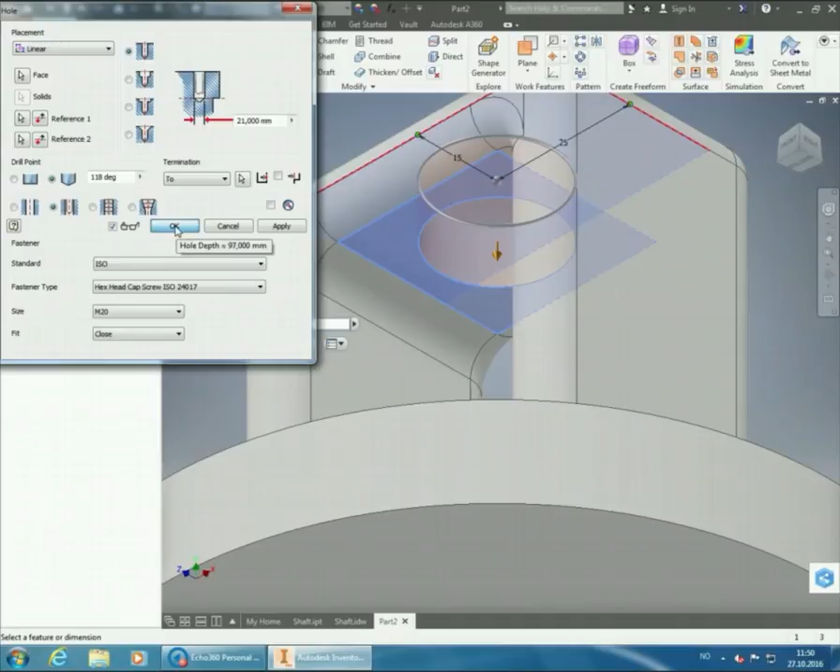If I now click on OK, I can rotate it back, and then we see we only have the clearance hole on the top. We don't have it going all the way through.

You select the surface underneath there.

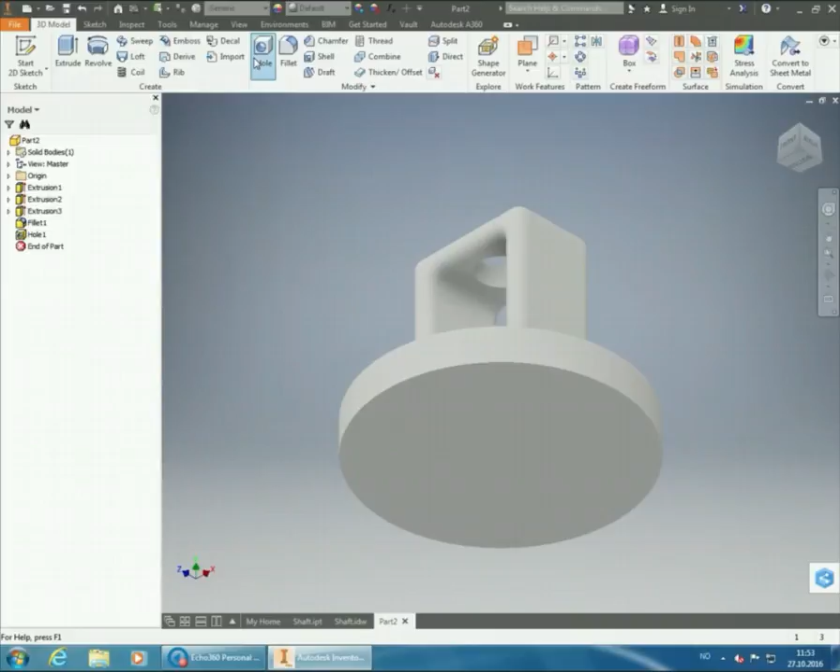So we're going to use the hole function again. And this time we can use the concentric one because we're going to have a hole in the middle of the circular disc. That's why, instead of creating it inside the square box, I am creating it from the underside instead, because then I can use the concentric reference.

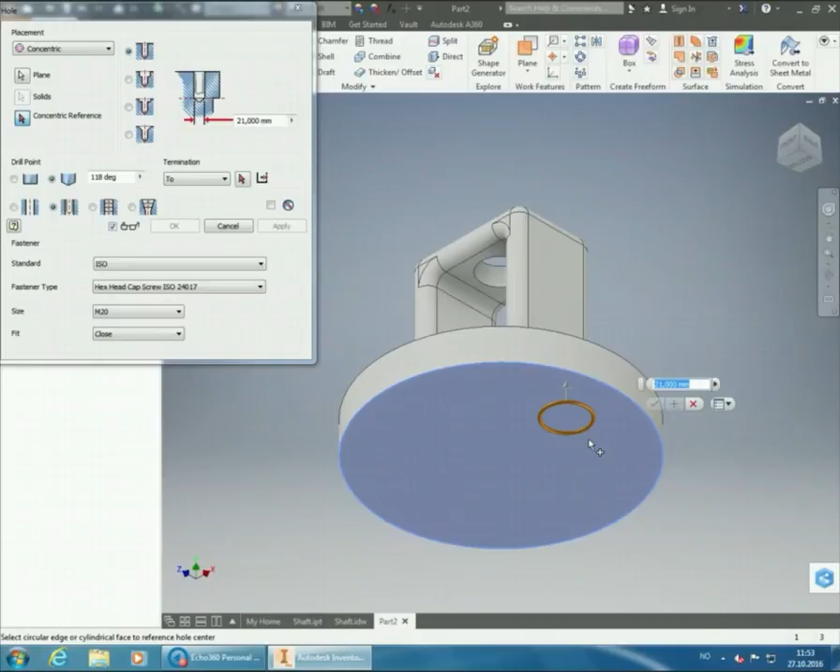So click on the underside there, select that surface, and then I select the circular edge of the disc. Then it's going to place it in the middle.

This time, we're not going to have a clearance hole, we're going to have a threaded hole. So we're going to click on this one, which is going to give us threads. And we need to select our thread type, the ISO Metric profile.

And we don't want 22 as our size, we want 20 as our size. And if we remember from the shaft, we had a pitch of 1.5 instead of the 2.5, which is the coarse one. So we need to switch it to 1.5 there.

And we want the threads to be along the entire depth of the hole that we're creating, so we're putting full depth in there.

In this case, we can actually make our hole through all, because the clearance hole up top here is larger than the threads we're using. So it's just going to pass through the middle of the hole and not touch the edges. Once we click OK, we get the hole in the middle here, and we can see it's put the image of threads inside the cylinder.

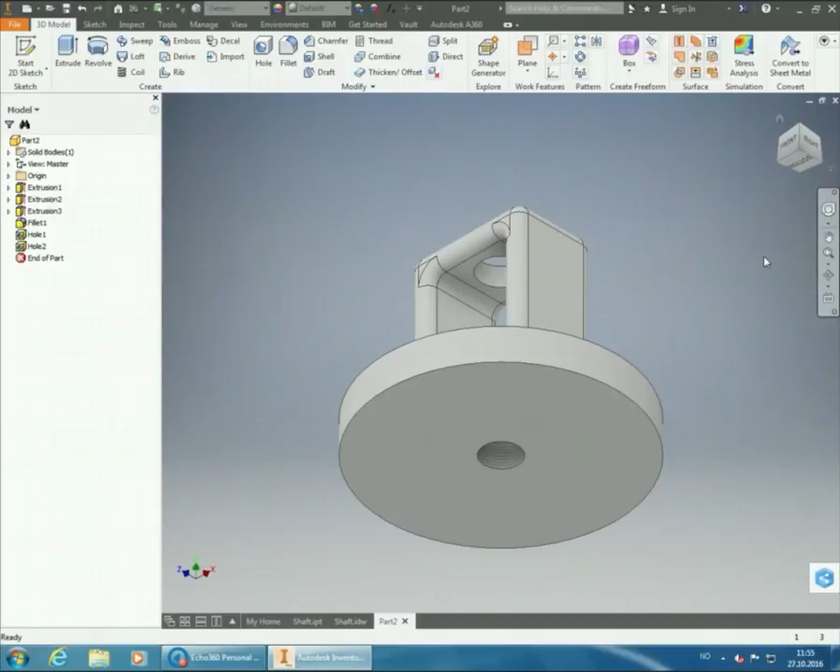Inventor has fixed all of our dimensions there. I'll tilt it around so that we can actually see the hole up top here also. We'll try to get the 4 flange holes also in place before we do a break.

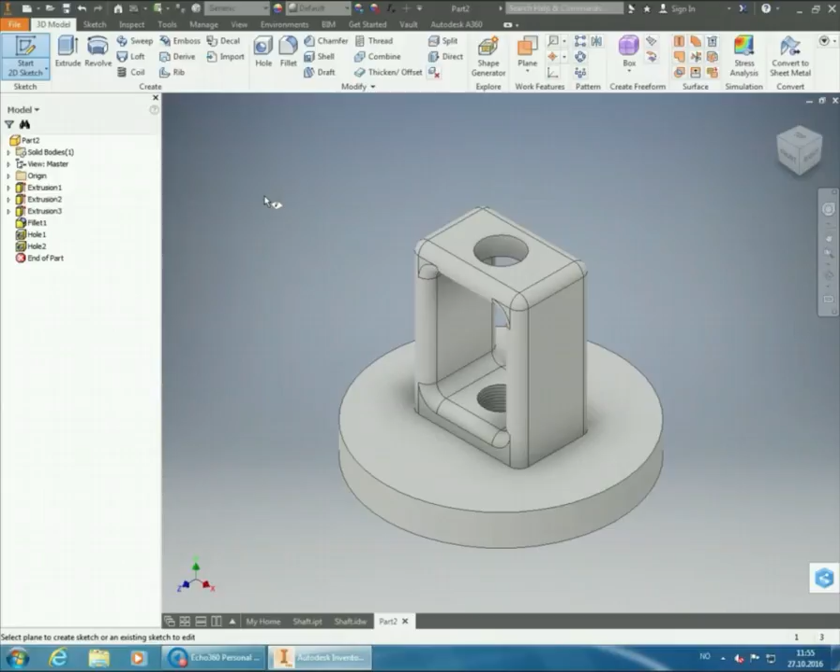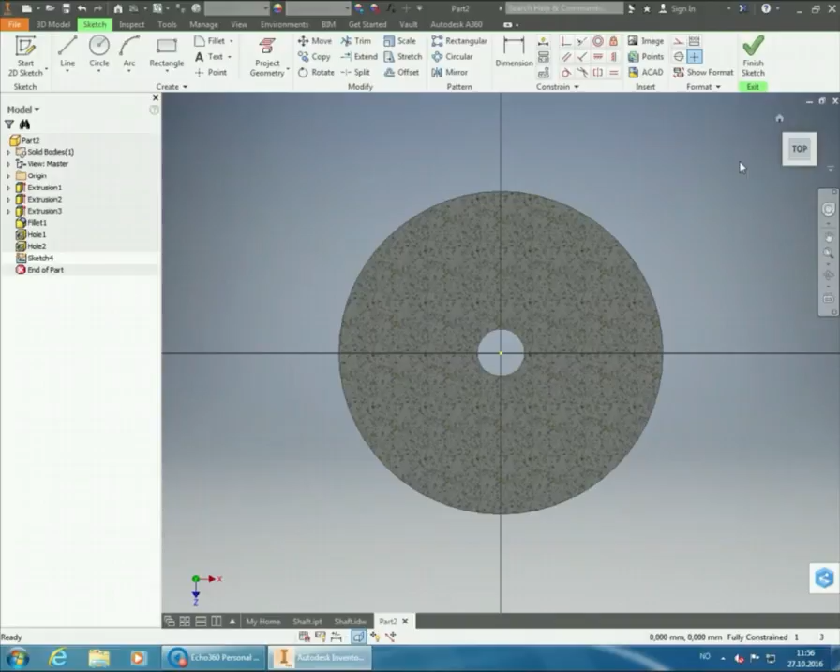We're going to place a sketch on top of the flange part we have here, the circular disc, and place 4 points, then use the hole function to create holes on top of those points. So I'm going to click on the top there. Even though this part in the middle isn't really obstructing our view, we still have the option of using the F7 button to just see the circular disc, if we want to.

So then I'll place a point up here, and I'll try to place it above the center, like that. I'm going to give it the dimension from center to point.

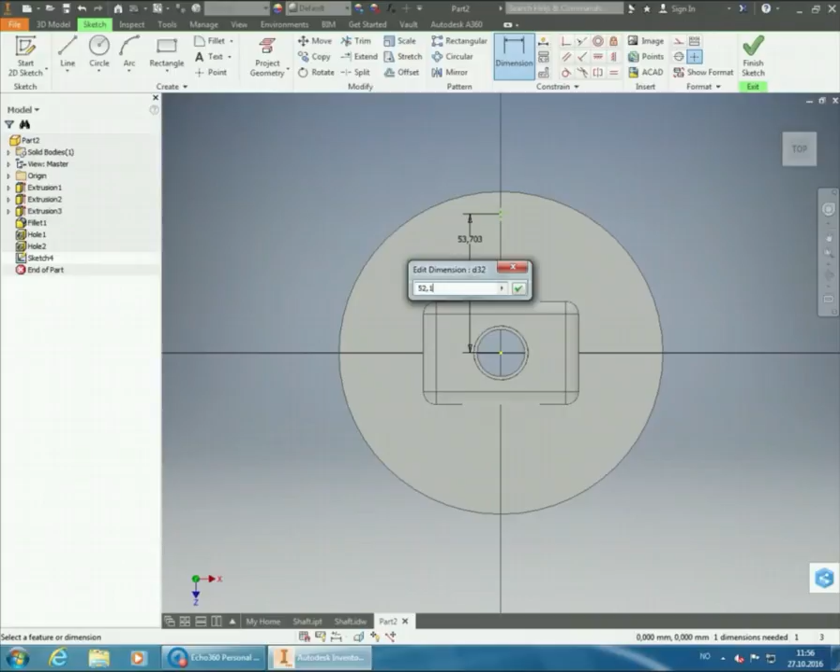We're supposed to have 52.1 millimeters up to that hole from the center, but I also want to make sure it's going to stay directly above, so I'm going to lock it into place with a horizontal constraint. I'm using this one up here, horizontal constraint, clicking both on my point and on the center point, because that means I can't move my point sideways.

It has to stay vertical with regards to the center point - I'm using the wrong words here, it has to stay vertical with regards to the center point, so it has to stay right above or right below. I can only move it up and down. But I've already set the dimension from the center point, so now it's completely locked, that's why it's dark blue.

Then we can either use a circular pattern in the sketch and create four points, or exit the sketch, create one hole, and use a circular pattern on that one hole to create all four. It doesn't really matter. I'm just going to use the circular pattern here. Choosing the geometry, that's only the point. Then I go over to the axis and choose the center point of my sketch.

Straight off it wants to place 6 points, but I only need 4, so I change it to 4. Then I get 4 points that are evenly spaced, all at a 90-degree angle. Then I click OK.

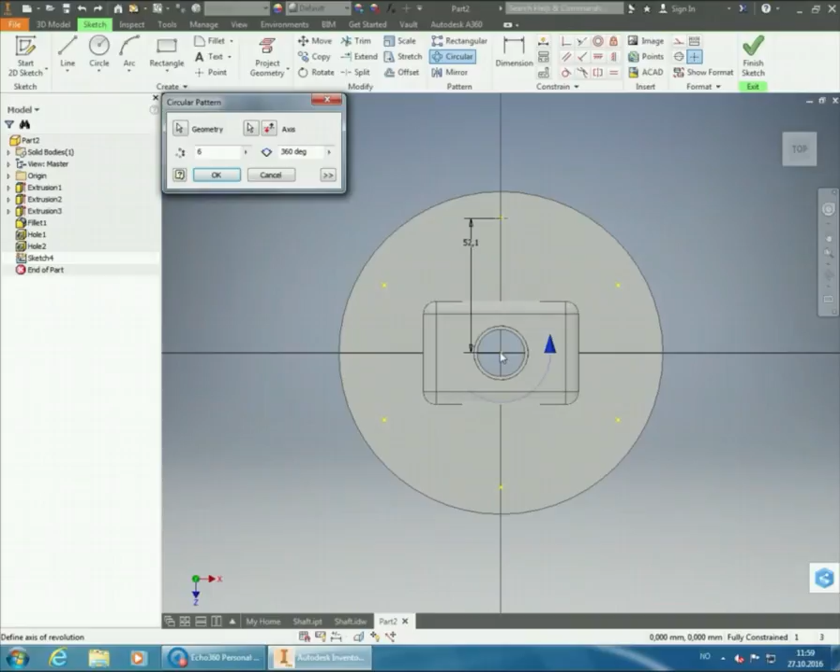Then it's asking me to give it a rotational axis, which just means I need to give it a point that it's going to rotate this across. So I click on the axis one there, go down to the center point of my sketch, and mark that one. Now it's revolving it around this, and trying to place 6 points at first, but I only need 4, so I change the amount to 4, and click OK.

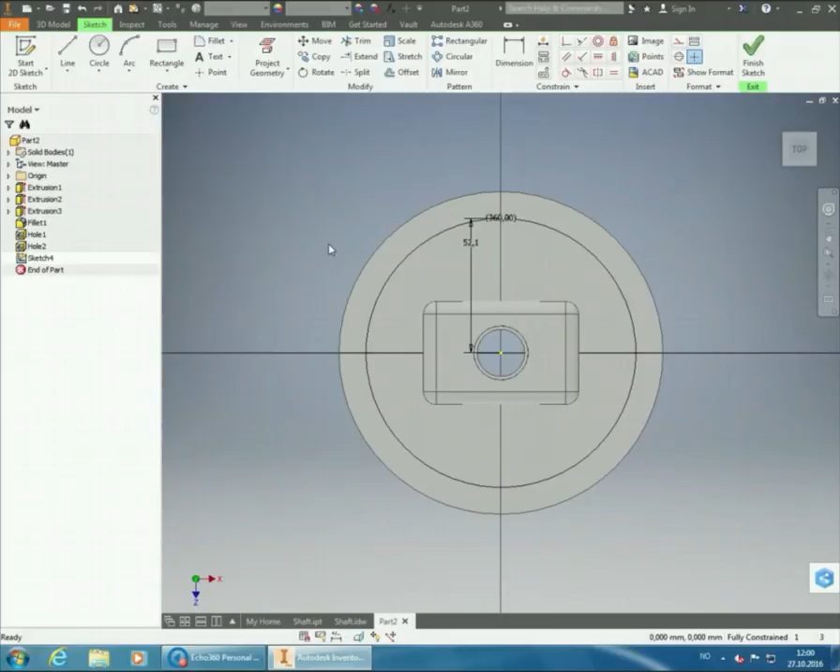Once those 4 points are in place, we'll click Finish Sketch and go back to the hole function. But this time we're not going to create threaded holes, we're going back to the clearance hole because we are going to have M12 bolts going through these holes, holding the flange in place. So we're going for clearance.

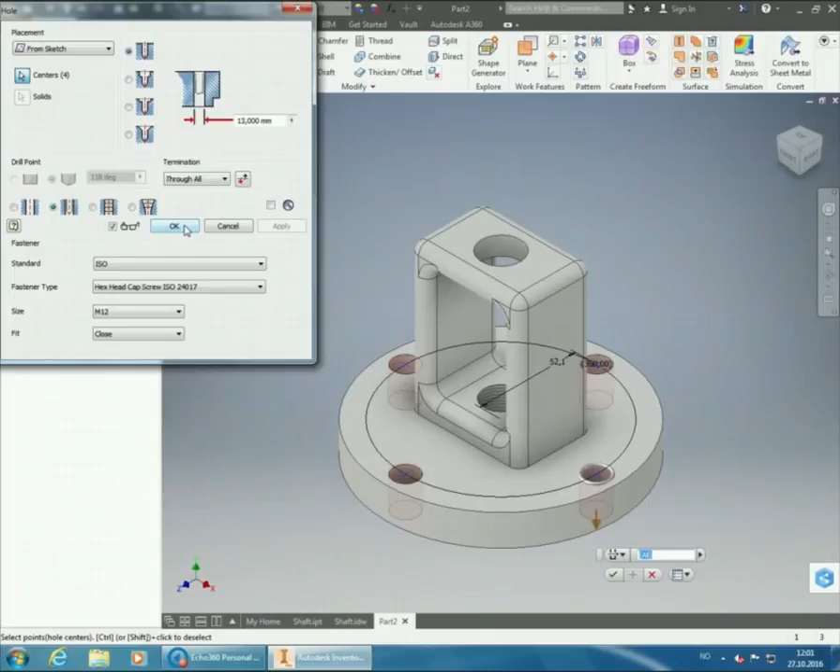We still want ISO metric threads, we're still going to use hexagonal head cap screws, but the size now is supposed to be M12. We're still going to use a close fit for it. You can see we have a 13mm hole for the 12mm bolts, and these 4 holes are supposed to go all the way through the flange. So we click OK, and then we have them in place.

Hex head, M12. Yeah.

We'll do a break, and then right after the break, I'm going to quickly show how we put the dimensions on a clearance hole, just to have that shown in a drawing also.